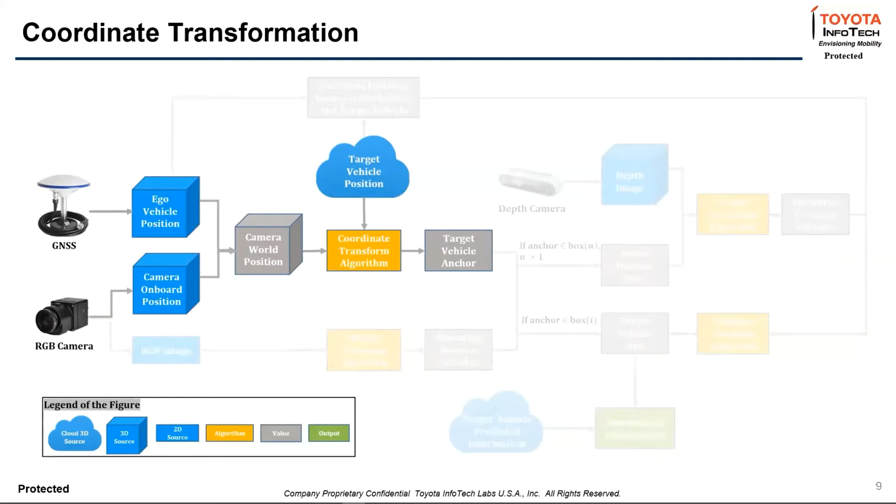So the first part is coordinate transformation. The 3D target vehicle location received from the cloud is transformed to a 2D point in the image plane, and that will help the identification of the target vehicle in later steps.

Generally speaking, to transform a 3D world coordinate PW in this figure to a 2D image point PI here, two matrices will be involved. The first is the extrinsic matrix, which transforms PW in the world reference frame to PC in the camera reference frame.

So the extrinsic matrix contains the parameters used to identify the transformation between the camera reference frame and world reference frame. So it's still a 3D point, but after the transformation, the reference frame is changed.

And the next step is using the intrinsic matrix to transform a 3D point PC to a 2D point PI in the image plane. The intrinsic matrix contains the parameters of the camera itself, such as focal length, lens distortion, and so on. After this step, the 3D world point is transformed to a pixel coordinate.

For example, if the left vehicle is our target vehicle, based on the location information from the cloud and the two matrices obtained by calibration, we could draw this point on our image plane for later use.

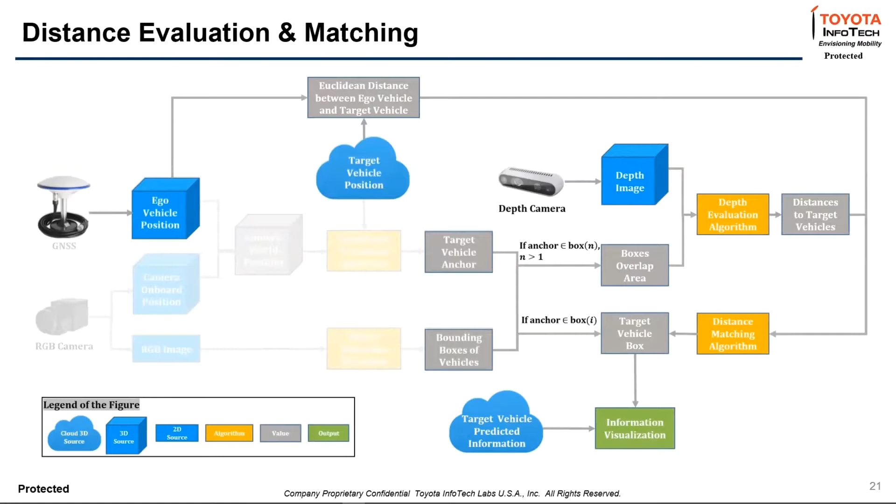So the depth image from the depth camera will be used to obtain distance information, and this will be compared with the true distance between the ego vehicle and the target vehicle to help determine the correct box.

So for cases like this, all vehicles inside are successfully detected, but the anchor point is inside both bounding boxes. So we could use the depth image taken at the same time and same angle, and that could help us get the distance from the detected area to the camera.

Since we want the distance to be as accurate as possible, we first redraw a smaller bounding box that will help avoid selecting points not belonging to the vehicle, like the road or the background sky. Then we randomly select a number of points inside this box, and we average them to get the distance.

We then compare this distance with the true distance calculated from the ego vehicle GPS and target vehicle GPS. After comparison, the box with minimum difference will be selected as our target box.

So we were using Unity to build a simulation to test and evaluate our framework. Here's an example: the cloud classified the driver in the right lane as an aggressive driver, so it will send this information to our ego vehicle.

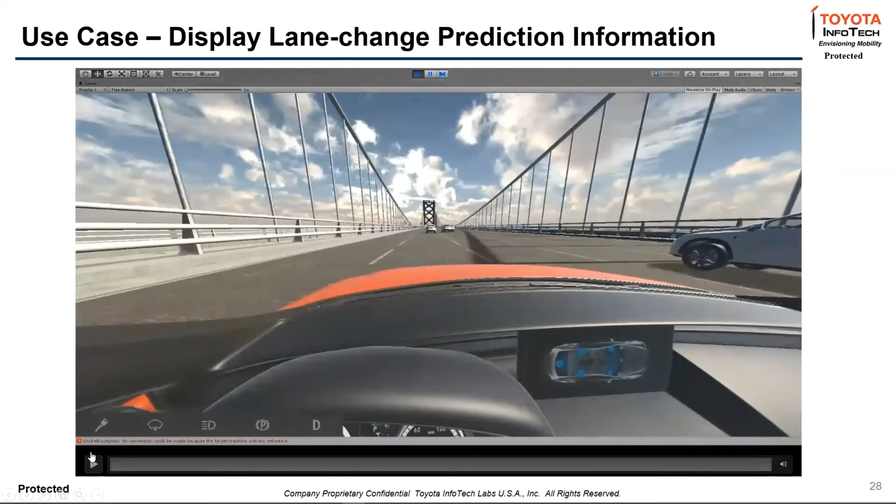So in conclusion, in this work we built a sensor fusion method for camera and cloud digital twin information. We implemented this driver visual guidance system in Unity simulation and showed the safety benefit of the proposed system. For future work, one direction is to improve the system's overall accuracy, and the other is to consider real-world implementation.

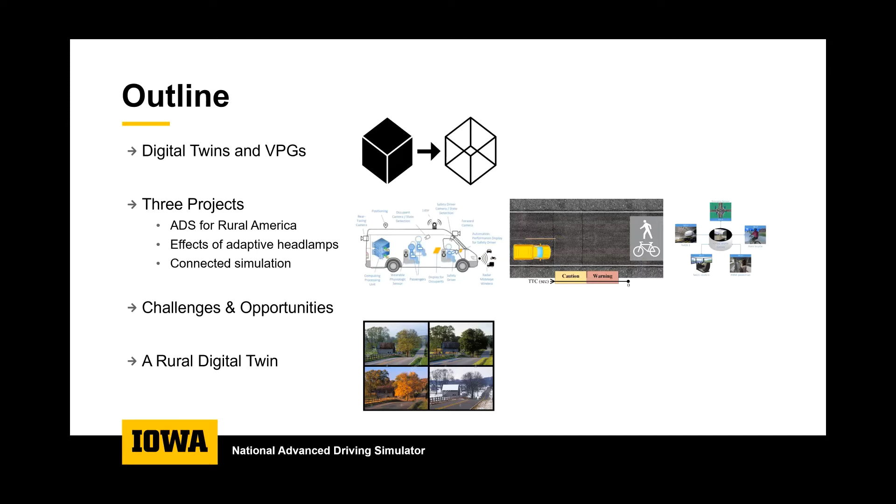So digital twins, you're going to hear a lot today about the cyber-physical element of digital twins, and it's a very exciting development. It is in many ways an evolution of digital environments and simulation that have come in the decades prior to this. The connection to the cloud is basically moving us from an era of small data into an era of big data.

And the idea of parallel driving, which I'll talk more about, makes the connection to our research, has to do with really modeling some of the invisible aspects of driving that fall beneath the surface of the more obvious and visible aspects of driving. For instance, the cognitive, or thinking, aspects of the driver, or the artificial automated vehicle.

I'm going to very quickly pull you now from this macro modern idea into a more micro world. You can think of macro maybe as being the big data and micro as small data. You could think of macro as being many actors in the simulation, and micro being few. However you want to think about it, that's sort of what I mean.

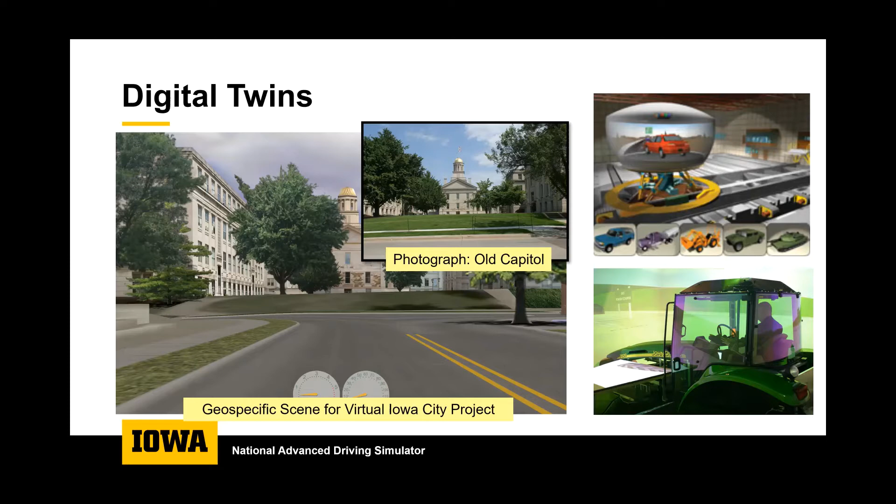Okay, so 3 projects I promised to talk about. The first one is called Automated Driving Systems for Rural America. This is a project that was fairly recently awarded by US DOT. We are getting started, but it's going to run for the next 2.5 years or so. Why are we doing this project?

Well, the benefits of automated vehicles are many, but in the safety aspect, we expect to see automated vehicles reduce and even eliminate all of these driver-based crashes, which make up 93, 94% of all fatalities. This first statistic is a bit striking - even though only 19% of Americans live in rural areas, nearly half of traffic fatalities occur on rural roads. So if we're serious about attacking this fatality statistic with automated vehicles and intelligent transportation systems, we must bring them onto rural roads.

However, rural roads have unique challenges, as we all know. They have outdated designs, poor paving and marking, limited line of sight. They have shoulder drop-offs.

There are animals that wander around, and the weather effects can be severe, not just during the weather, but after the weather. After a rough winter, a road that you see there would be just trashed and, you know, have ruts in it perhaps. And so it can be quite serious.

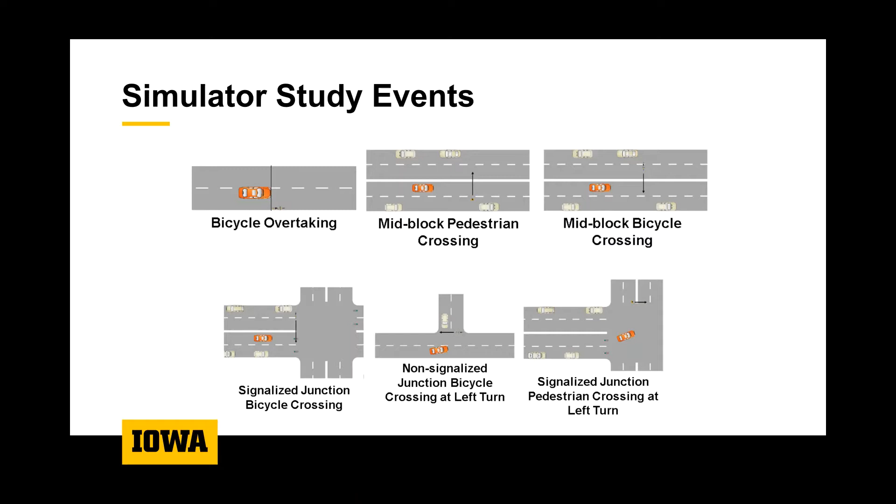And then the icon, I'm not showing a video of the icon because in the video, it just doesn't show up well. I mean, the pedestrian can see it, the bicyclist can see it, but they're kind of far away and it just doesn't show up in the video. So I can't show a good video of that.

Third study, developing connected simulation to study interactions between drivers, pedestrians, and bicyclists. And this was a study recently concluded, funded by US DOT Federal Highway. And there's some similarities with this one and the last one. It's concerned with pedestrian fatalities, of course, but also two-vehicle crashes, of which there were almost 12,000 in 2016. And the thing that these two statistics have in common is that they're concerned with the interactions between road users.

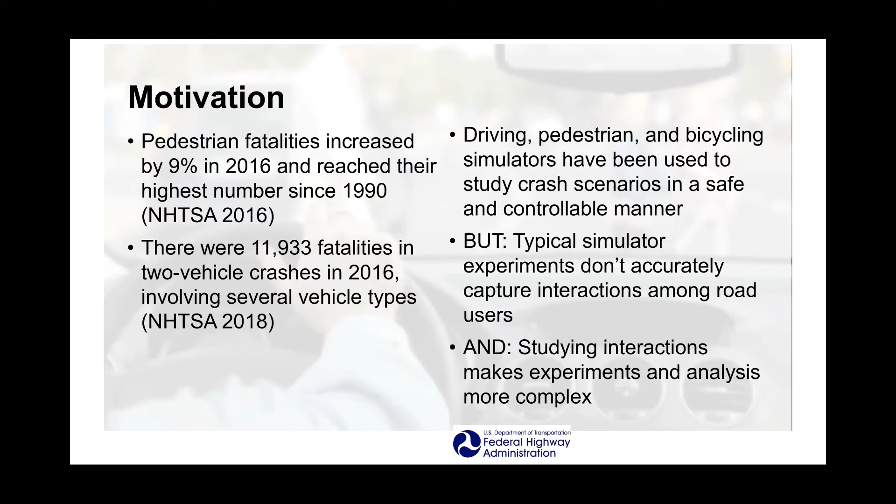And to do so, though, makes everything a little bit more complicated. Makes the experimental design more complicated, makes the analysis more complicated. Nevertheless, a worthy thing to do, we felt. So we developed an architecture to include the driving simulator, pedestrian simulator, bicycle simulator, miniSim, and scenario traffic into a common environment and designed a little database and used that to run a little data collection.

And importantly, the feature that we added here was the ability to create avatars for the pedestrian or the bicyclist and also for the driver inside the vehicle, so that you could see each other's avatars and you could look and you could gesture. So here's what that technology looks like. On the right, you can see a grad student, Shomo, who's wearing a headset. And on the left, you can see the driver in the NADS-1. And I don't know if you can see my mouse, but I'm circling the avatar for that pedestrian.

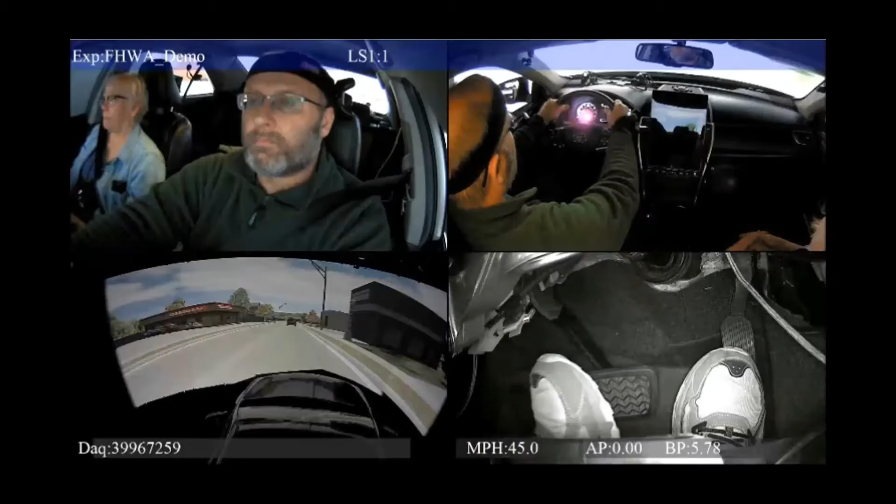So the driver can see the pedestrian is seeing the same virtual world, sees that red car, sees the driver's car, and you can see he's waving now and saying, I give you permission to drive, I'm not gonna cross. And so then the driver shifts into gear and drives forward. So there's an example of some good interaction. But what's really interesting is to then see this with some novice participants. So we did a small proof of concept data collection. We had 14 pairs of drivers and pedestrians.

So here's an interaction between a driver and a pedestrian avatar. So there's a real person behind this pedestrian, and you can see some good gesturing going on. Now this pedestrian turns around and he's like, okay, cross again. In the real world, pedestrians don't just walk back and forth across the street over and over again, but they kind of did that in this study a little bit. Now here's an agent-controlled or computer-controlled pedestrian. Look at the differences in the behaviors.

Now this is not bad animation. This is pretty good animation of a pedestrian, but there's no looking, no turning of the head. There's no indication that there's interaction at all. So here's another driver. That's a computer-controlled avatar. Again, no interaction really whatsoever.

And then here's an interaction between the driver and a human-controlled avatar of a pedestrian. Now this pedestrian turns around, looks like, oh, they want to go. And the driver did a flurry of foot movements from their brake to their gas, like she wanted to go, but she ended up stopping. And now here's the same thing from the point of view of some of the pedestrians.

They're able to see the same world, and they wear trackers on their wrists, on their ankles, and one you can see on the back of the waist. So that's 1, 2, 3, 4, 5 trackers. And then the HMD also counts as a tracker. This is the Vive Pro. So you can see in the background, there's a base station. Vive needs base stations to do the tracking.

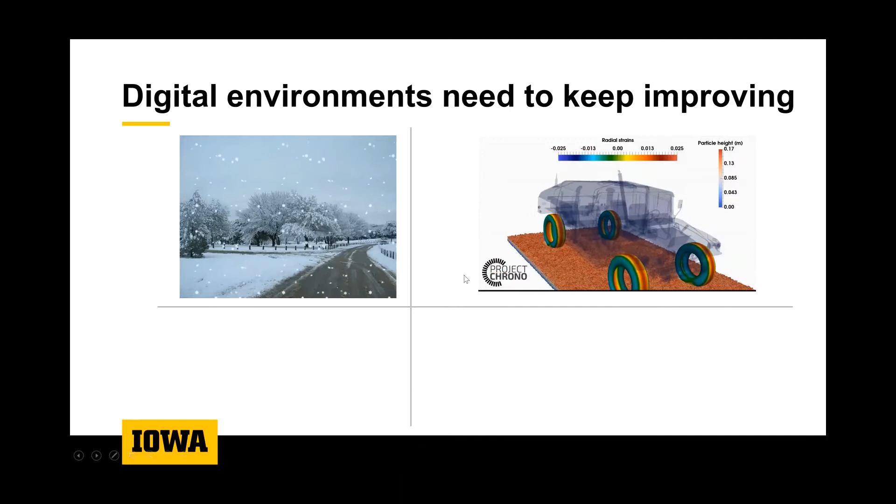It's one of the things that Iowa was very famous for a long time. And this particular example is coming from Project Chrono, which our colleagues up at University of Wisconsin work on, along with another team at University of Parma. So they're doing fantastic work on high fidelity vehicle dynamics. And I think that these are going to be critical to operate in the more challenging environments at the extreme edges of their performance, okay?

And then these two challenges now bring up a whole other challenge, which is the verification and validation of these simulation environments. We know that V&V is a challenge for simulation already. Every simulation tool that you put into the mix sort of needs to be validated on its own to know that you actually have trust in that tool. And now I'm proposing to make the visual environment more complex, to make the vehicle model more complex. That vehicle model may go from having tens of parameters to having hundreds of parameters. Big challenge.

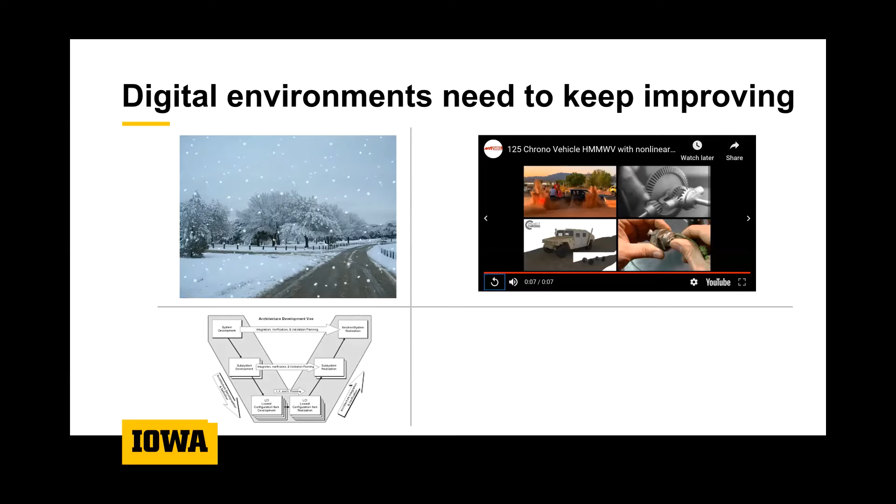One more challenge I'll point out. We're going to need to move from an environment of sensor simulation that says, oh, I can model a LiDAR, I can model a radar, I can model a camera, to one which says, well, is your LiDAR model modeling a Luminar or a Velodyne or an Ibeo? What exactly are the characteristics there? And how does each one differ? And are they validated models that we can use for a particular manufacturer of vehicle? So all of these things are ways that VPGs need to evolve into digital twins and need to evolve further and further. And they take more processing power, they just take more work.

All right, so now I'm getting to a point where I'll start to try to take you back from the micro up to the macro, if I do my job anyway. So my vision for a rural all-season digital twin would look something like this. We're doing this great study from USDOT, where we're collecting all this data on a rural environment. So we should go ahead and model that environment using the data that we're gathering, the HD map that we're creating, in order to have a digital twin and VPG capability.

The sensor data, we are collecting this data all throughout the year, day and night, all four seasons. So we should be able to come up with good models. I don't know how important it is to differentiate summer from spring, but capturing those winter conditions certainly will be very important. Not just because there's snow on the road, but there's no leaves on the trees, and the whole picture of the environment is going to look different.

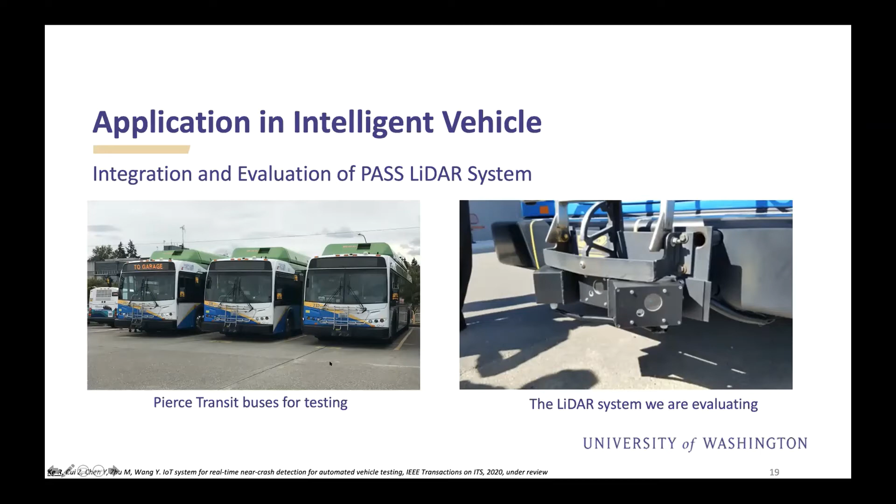These are the Pierce Transit buses we are installing our systems on. On the right picture, this is the LiDAR system we are evaluating. They have 3 LiDARs for collision avoidance and detection, and we are trying to evaluate it.

Before installing our system on the buses, we tested the system in some cars, basically our personal vehicles, before officially installing them on the buses. I put a dash cam, a power inverter, the NVIDIA device and some GPS modules in my own car and drove it around for some time to collect data. Here's the software flow diagram for the system.

The cool thing here is that with the AI-based detection results, there are bounding boxes, and we modeled those bounding boxes and found it's very useful information. With a camera model and some new algorithms, we can use the bounding boxes generated by the deep learning detector and tracking results to get the TTC, the time to collision, and horizontal and longitudinal motion information from just a single camera. And we developed pattern identification rules for the near crash.

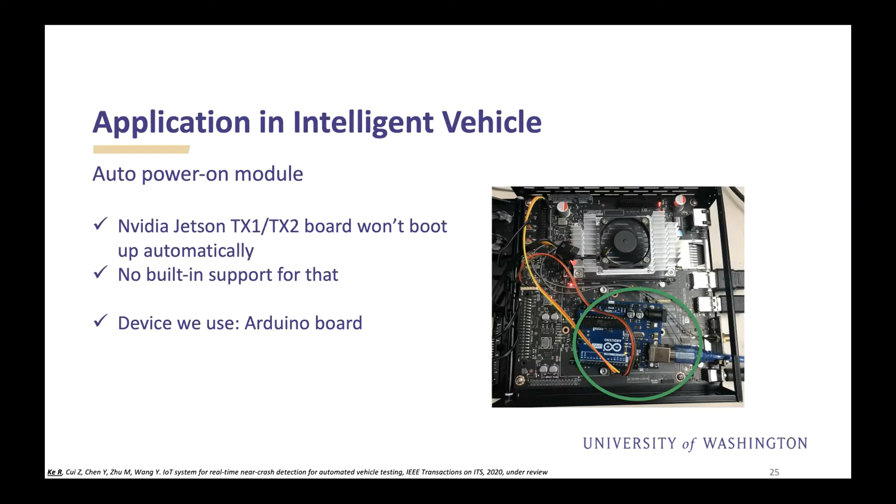We did some installation in August, and here are some system components. We also developed an auto power-on module, because the NVIDIA Jetson unit cannot boot up automatically, but you don't want to push the start button every time the bus starts off. So we used an Arduino board - although it's overkill - for the auto boot up.

Here's some data we collected from the different systems, and we also sample some random events to check if there are any false negatives. Here's a short video I uploaded, and you can see the detection when a near crash is detected. For demonstration, we use a red box instead of a regular green box for the detection.

I also want to mention that for this video, we did not really do a lot of transfer learning or fine-tuning with specific datasets. This is just based on the COCO dataset, a pre-trained network. But you can see the detection of the near miss is still pretty good.

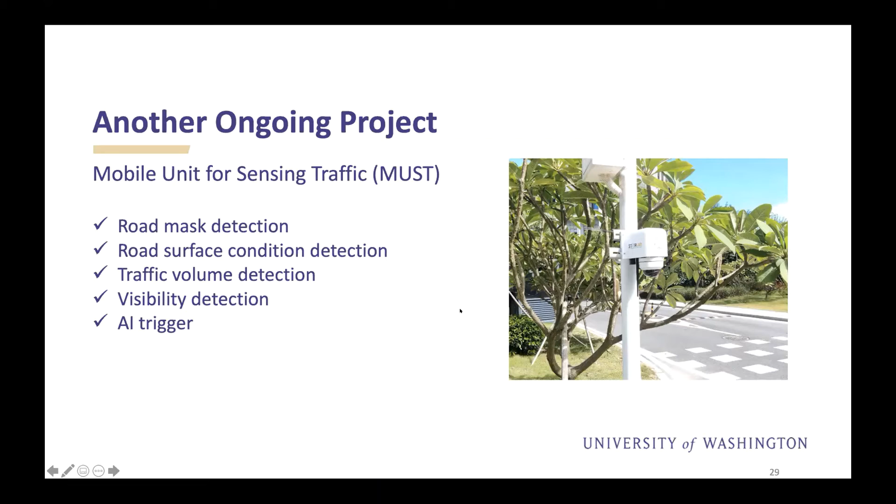That's a good question. For that specific system, it's for parking surveillance, but we can modify the algorithms - we can do it in a short time to adapt it for other similar applications, like monitoring traffic at intersections or roadways. The last thing I mentioned, we have traffic volume detection, and this is based on a similar detector and structure as the parking system. So pretty much it's the same IoT system architecture, but just running different algorithms.

Yes, yes, I see, okay. Another question comes from Yong Kam: the near crash detection you mentioned in the second part - is it a pure vision-based approach, or is it a hybrid kind of approach? And the second question is, do you consider any other data sources like CAN or IMU from the vehicle?

Yeah, for our part, the near crash detection is just a vision-based method. But as I mentioned, we do have communication via the CAN network with another LiDAR-based system. For the project, we are doing some data collection and evaluation, so we are not yet using the CAN data, like the IMU or G-force data, to detect the near crash. But there's potential, because we have already done the communication with the LiDAR system, and we can certainly do some fusion with their system in the future.

Mm-hmm. And based on that, maybe a follow-up question. I think you mentioned the hardware setup that you guys have is kind of overkill, so I assume the computational power for that is very strong, or the computational time of your application should be minimal, right? What's the ballpark? What's the scale of the computational time for your application?

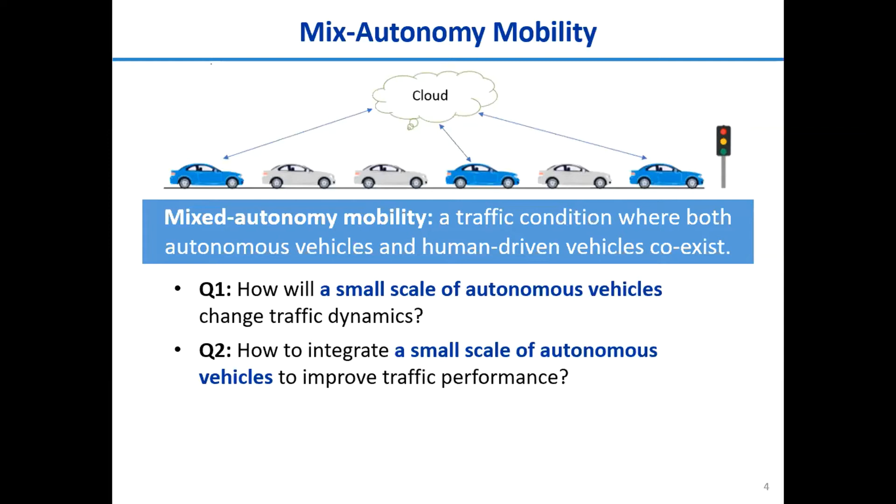So many of you can ask many interesting questions. I think some of you will ask, how will a small scale of autonomous vehicles change the traffic dynamics? And also, how can we control or integrate a small scale of autonomous vehicles to improve the global traffic performance, in addition to the performance of the individual autonomous vehicles? So these are two very interesting questions. I think most of you have thought about it or have shown some promising results from some other aspect.

In this talk, I'm going to first present some theoretical evidence of the high potential of autonomous vehicles in improving traffic performance, from a control perspective. And if I have time, I will also briefly touch on the practical design using distributed control and the scalable optimization for such integration.

Before going to the technical results, I would like to highlight two benchmark experiments for further motivation. I think most of you have seen this experiment. They are quite famous. So the first experiment was carried out in 2008.

Sugiyama and his colleagues put up this very beautiful experiment in a ring road setup. There were 22 human drivers, and they were asked to drive at 30 km per hour to follow the preceding vehicle. This environment is very simple. There's only a single lane, no traffic lights, no stop signs.

But we still see traffic waves emerge from this simple traffic scenario. So basically, it highlights that traffic jam can be caused purely by the stochasticity of human driving behavior, or some bad driving behavior of some human drivers. This experiment is very, very interesting. We know bad driving behavior can cause much loss of traffic efficiency. And what can we do if we have an autonomous vehicle in the system?

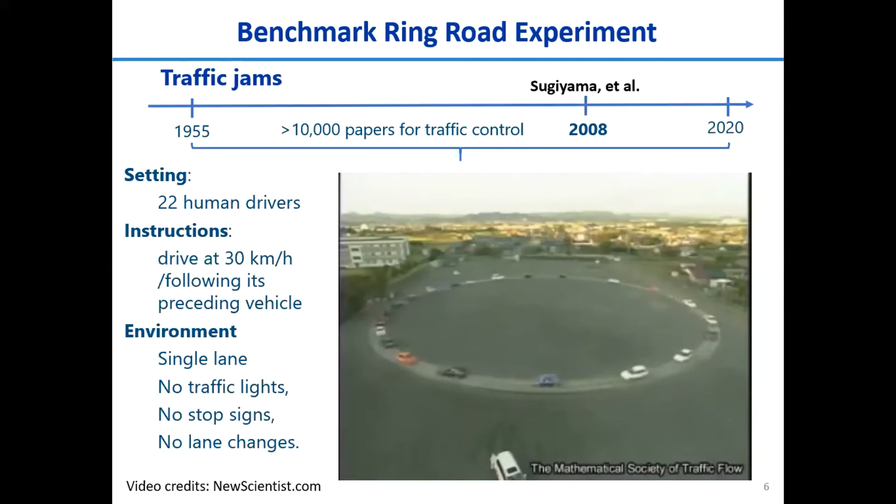I think most of you have also seen this experiment. About 10 years later, in 2018, Stern and his colleagues reproduced the experiment. They replaced one human-driven vehicle with one autonomous vehicle. In the beginning, the autonomous vehicle was not controlled, so it was driven by a human. Then we saw the traffic wave happen again.

After the controller is activated, the control of the autonomous vehicle can actually smooth out the traffic wave relatively quickly. This experiment is also very interesting. It shows that in practical traffic scenarios, control of an autonomous vehicle can do much good to improve traffic performance. I think one speaker of this workshop is the co-leader of this project. Probably he can talk a little bit more about this later.

So we have seen some good experimental results. What I am interested in is the theory behind it. Can we explain this kind of scenario? Can we explain why it works, why the autonomous vehicle can smooth out the traffic wave? There are some explanations, and here I would like to talk about it from a control perspective.

I'm also interested in whether this works in other setups, like with different numbers of human-driven vehicles, such as 100 human-driven vehicles and one autonomous vehicle, or a few other autonomous vehicles, or in other scenarios. Does the autonomous vehicle have the capacity to smooth out traffic waves quickly?

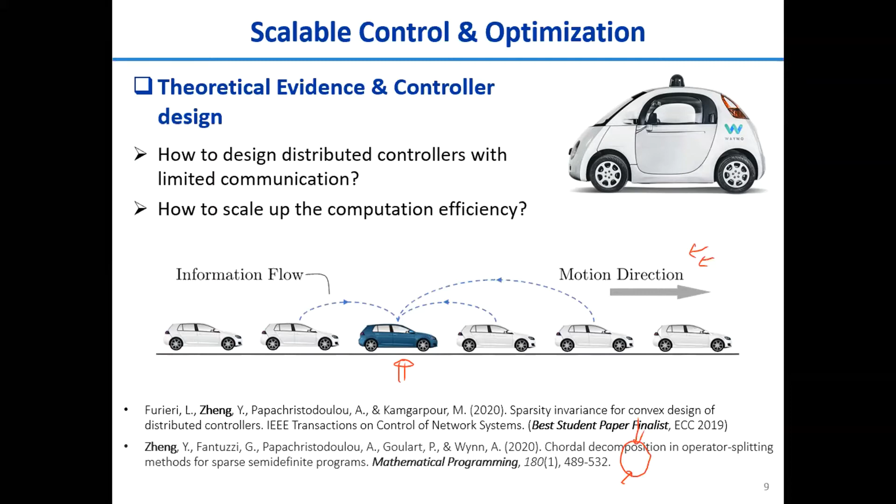So I'm going to talk about the first part, about some theoretical potential of autonomy in mixed traffic. Especially, I'm going to talk about stabilizability and using autonomous vehicles as mobile actuators. I'll introduce a new notion of leading cruise control in the first part. And if I have time, I'll briefly touch on the second part, about how to design the controller and how to solve the problem efficiently using some advanced control and optimization techniques.

Okay, to be concrete, let's first start with some system modeling. Just bear with me, there's a little bit more notation, but just the minimum to be concrete. In this system, we have two kinds of vehicles. The first is an autonomous vehicle where we have direct control. The second is a human-driven vehicle. They have a fixed car-following dynamic, and we cannot control them directly.

For the human-driven vehicles, they have a car-following dynamic, and normally it's something like this: the acceleration of this vehicle depends on its spacing, its relative velocity, and its own velocity. So this is a nonlinear function. Many works have identified this kind of structure, and there are human driving models to describe this behavior, but here we just assume this nonlinear function to describe the car-following dynamic. At one equilibrium point, the acceleration of all vehicles will be 0, and the relative velocity will be 0. So we have this equilibrium correspondence between spacing and velocity. Normally, as humans, we have a larger spacing if we're driving at a larger velocity -- a bigger velocity corresponds to a bigger equilibrium spacing. It's just a fact.

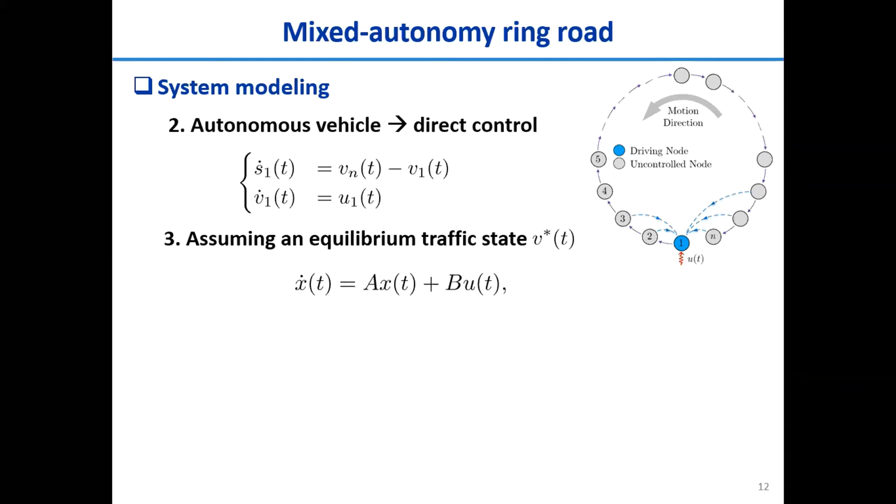For the modeling of autonomous vehicles, we just use a simple second-order model for this analysis. Basically, we can directly control the acceleration of the autonomous vehicle, so this is a second-order system. The global system will still be nonlinear. For analysis, we can linearize the system around some equilibrium traffic state, V star. Then we get this standard state-space form in a canonical form.

For this particular structure, we know the matrix A will have a cascading structure because it's a car-following dynamic -- each agent only has direct interaction with its preceding agent. So this kind of structure appears in the matrix. And again, because we can only control one node, only one element here is non-zero; all the rest are 0, meaning we do not have direct control for those nodes. So this is a network system with only one controllable node.

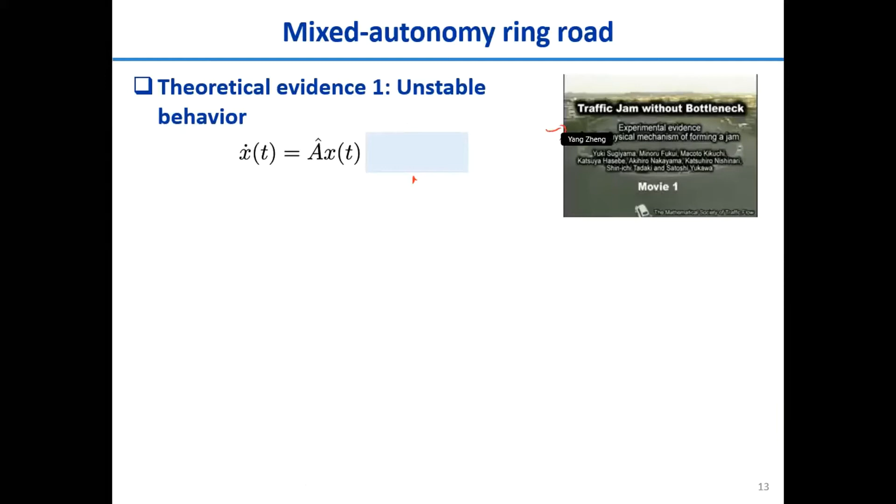With this setup, we can talk about some results from control theory. First, if we remove the control -- if all vehicles are car-following with a fixed car-following dynamic -- basically we don't have control corresponding to this setup. It's known in the literature that if the car-following parameter satisfies some condition, the system will be unstable. This parameter corresponds to the sensitivity of drivers to speed and spacing error. So if the driver has a very slow response, the system will be close to unstable, meaning the eigenvalues of this matrix will have a positive real part. Here are some simulations corresponding to different system sizes, the number of vehicles in the system, and for this parameter setup, we can see some eigenvalues with positive real part.

So basically saying this system is not stable at this particular equilibrium point. And then this is the time domain simulation. So this confirms the finding here. And basically we can also see the outcome from the experiment here.

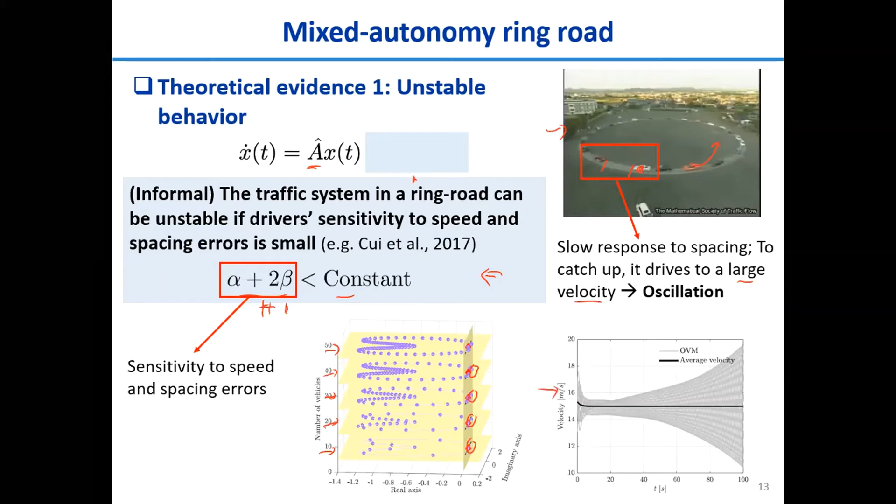So this driver has slow response to some spacing, and then it slows down and tries to catch up. So it will drive to a large velocity, and this kind of behavior will cause some oscillation, and the oscillation will be propagating along this system, and we will see the unstable behavior as we saw in the video before. Okay, this is the first theoretical result.

People know this. And the second thing is, what if we bring back the control of the autonomous vehicle? So we have one node that allows us to do some modification of the system. And then what happens if we have this kind of input here? So then in our paper last year, we proved that in theory, the linear system AB is not controllable, but it's stabilizable.

It's not controllable, which means there's a mode corresponding to the ring road structure that cannot be controlled, but all the rest of the modes can be controlled. So since that uncontrollable mode is stable, this system is stabilizable, which means the autonomous vehicle actually can change the traffic dynamic fundamentally. So we can modify the system, we can stabilize the system.

And this result actually is independent of the number of human-driven vehicles, which means if you have 100 human-driven vehicles and only one autonomous vehicle, in theory, it can be stabilized as well. But in practice, it will probably take a longer time and more energy. And this result is also independent of the car-following dynamic. So no matter what kind of car-following dynamic, as long as the linearized dynamic has this structure, our result holds. And so basically, this offers very strong control-theoretic support for the potential of autonomy in mixed traffic.

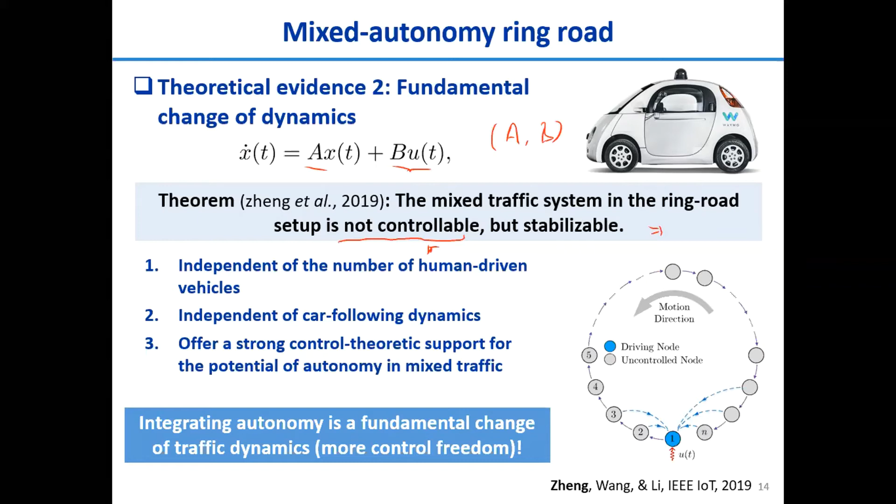And so basically, integrated autonomy is a fundamental change of the dynamic. So we have more control freedom to modify the dynamic, to stabilize the system, and to smooth out the undesirable traffic wave. Okay, this is the second evidence. And then we can do more. We can go beyond stabilization.

So basically, because the system is stabilizable, we can stabilize the system at another equilibrium point, not just at the original traffic state. And we have proved that the traffic velocity actually can improve to another value. The value will satisfy some bound, so there will be an upper limit, but it can be improved a lot. And this figure demonstrates the idea behind this theorem. So suppose all the vehicles are human driven, and then at the equilibrium point,

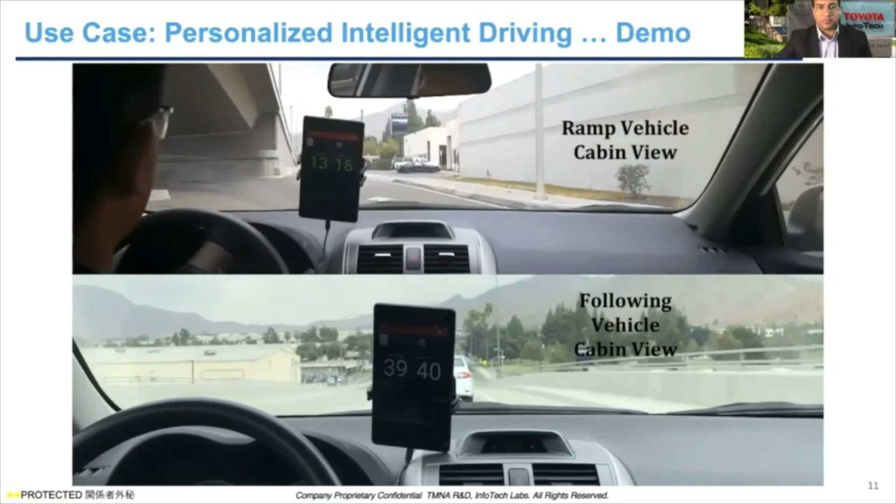Be careful, traffic may be merging into your lane from another roadway.

And what you're seeing on the screen is the speed advisory each driver sees. If they overshoot, it goes red. If they're undershooting, it's green, so they have to speed up.

So that was the demo we did with 3 real Toyota cars connected to the edge and the cloud network at one of our partners. So there is plenty of opportunity getting enabled with big data, with the car becoming an IoT device with multiple sensors, and the connected vehicle.

In order to realize this opportunity, we are building what we call the Toyota Mobility Service Platform, or MSPF. This really is a combination of our mobility platform, the data coming from the sensors, and, as I mentioned earlier, the disruption within the services industry, where you're not owning the product but still receiving value through services. And Toyota is trying to be the most reliable mobility service provider in the world, just like the most reliable car company in the world.

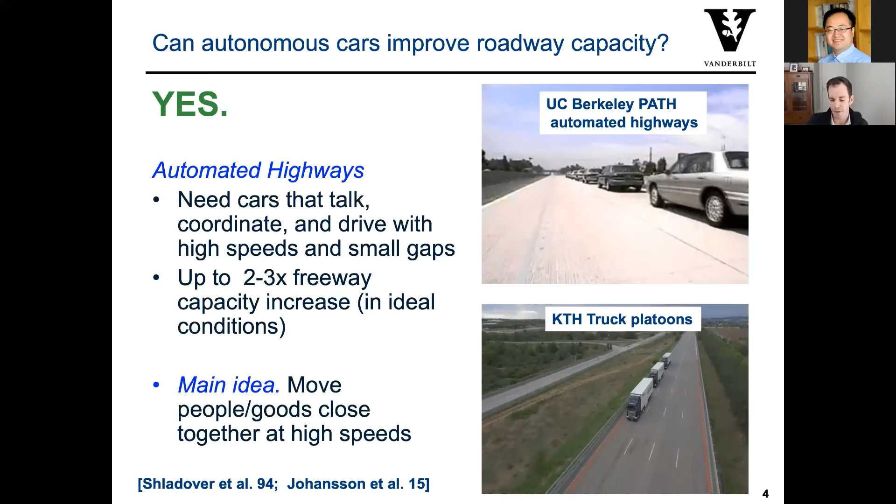So the core idea is, if you want to increase capacity, you need to be able to move people close together and at high rates of speed. Now, I just want to remind us that this is not only possible via technology. If you want to double the capacity of the roadway, all it would take is everyone carpooling. If you could pick up one more person, we'd effectively double the capacity of all the roads in the world. If you wanted to 3x the capacity, well, you could just pick up 2 more people.

When I start thinking about 3x increases in capacity, this is capacity in terms of people moved rather than vehicles moved. This is something that is going to be very difficult to do with automated vehicles unless we change their shape and physical dimension. So we should be looking at alternate ways to increase the ability to move people beyond pure vehicle automation. Now, on the other hand, I don't believe that vehicle automation is not going to come with some benefits. Quite the opposite.

I actually think that even self-driving cars at a small penetration rate can have a big impact on some of the most frustrating types of traffic congestion that we see on the roadways today. So in the time I have left, I want to show you some of the work that we've been doing to try to understand the impacts of vehicle automation to eliminate phantom traffic jams, and also some of the limits that we see with current vehicle automation systems, with an eye towards what we can do in the future if we were going to try to get high penetration rates of technologies out on the roadway that can make traffic better for everyone.

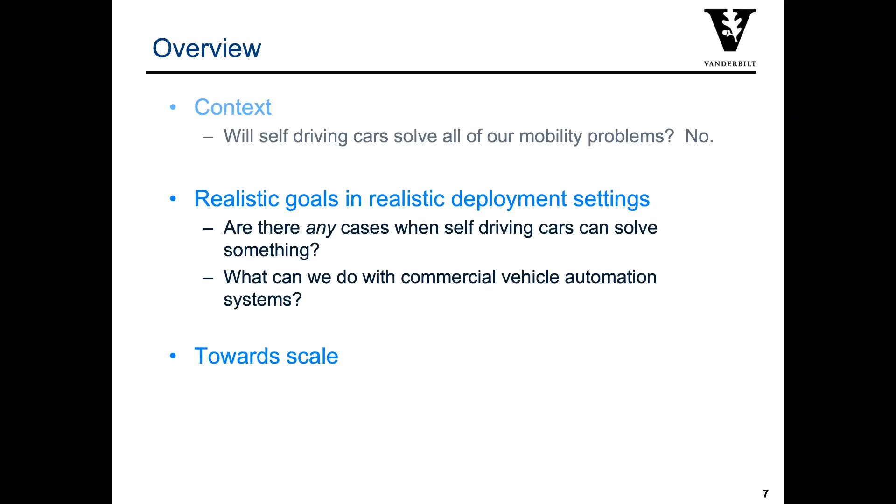So we saw this video earlier in one of the talks, the famous experiments that were done in Japan about a decade ago that carefully, experimentally isolate that human driving behavior alone is enough to create these so-called phantom traffic jams. You see the cars all driven by humans racing around the track, and just due to the nature of human driving, fundamentally the instabilities in the car following dynamics that humans operate under, you see these small perturbations grow into traffic jams that are persistent on this track.

And we know that these jams don't just exist in these isolated laboratory conditions, but you can observe these on open roadways. This is a video from a roadway in Georgia, where again, you can see this collection of vehicles that are completely stopped, propagating against the flow of traffic, seemingly occurring without an obvious cause, but are in fact due to the way that humans drive. And that's the point, right? If you have level 1 vehicle automation systems, those replace some of the driving tasks and some of the operational domains with automation instead. And that gives us the potential to control these types of effects so that they no longer occur.

I see an old friend, Baik Hoh, from my days at Nokia on the call here today.

You know, a decade ago, we were rethinking about how putting GPS-equipped phones in cars, even at low penetration rates, could fundamentally change the world for traffic estimation. Today, we're using those same ideas and not looking at phones as the key enabling technology, but looking at the cars instead as the enabling technology. Automated vehicles, even at low penetration rates, may have a game-changing ability to change the way that we manage traffic flow, specifically to eliminate these types of very frustrating phantom traffic jams.

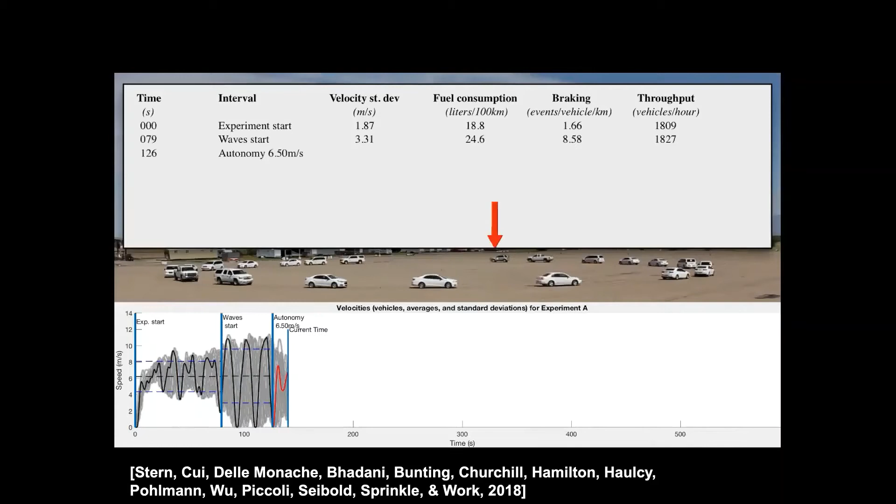In 2016, we teamed up with some of our partners at Rutgers, Temple, and the University of Arizona to repeat that experiment that was done by Sugiyama and their collaborators in Japan. This time we're on a circular track in Arizona, and this car that is being traced with a black arrow is a several $100,000 automated vehicle platform run by Jonathan Sprinkle at the University of Arizona. We initially have all the cars controlled by humans, and then when the arrow turns red, it's now being controlled. One car is being controlled with a controller that is designed to smooth out the jam, or to stabilize the flow on the ring is another way to look at it.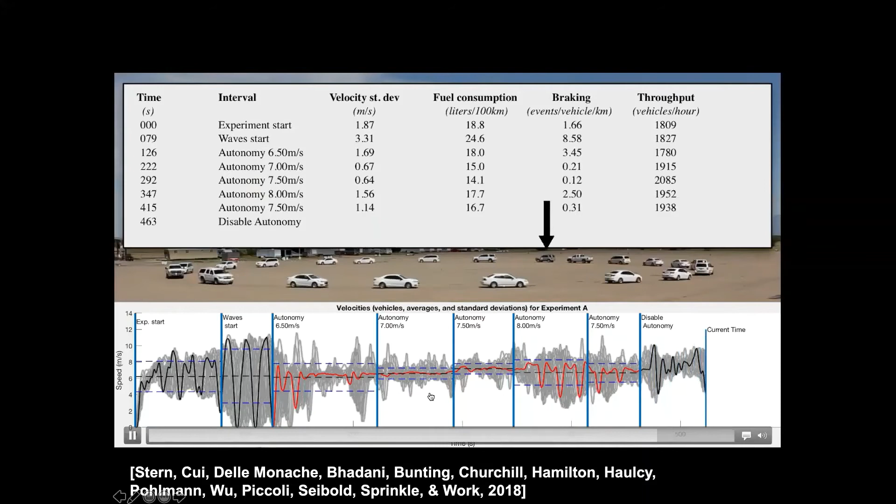By controlling that one car, the remaining 20 cars on the track, all controlled by humans, had a significant reduction in the amount of stop and go driving they experience, which led to a significant reduction in the fuel consumption. We measured the fuel consumed of all the vehicles via the OBD2 ports on those cars and measured a 40% reduction in fuel consumption when we compared the traffic in this highly oscillatory stop and go driving, which was observed when all the cars were under human control, compared to the condition where one of those vehicles is switched to an automated vehicle platform that is designed to smooth out the traffic flow.

So this work was very inspiring to us to recognize that there's potential to fight phantom traffic jams with vehicle automation. But the challenge, of course, is that to scale, we can't do this with vehicle platforms that are going to cost hundreds of thousands of dollars, or we'll never be able to get to the number of vehicles needed to do this on an open roadway.

So in the meantime, we've started looking at what you can do with these level 1 and level 2 vehicles that are available on the roadway today. And one of the open questions is, can the current vehicle automation technologies already get us the benefits that we saw in the previous video?

Well, it turns out that quite a bit is known in terms of how these phantom traffic jams occur that date back to the traffic science community in the 50s and 60s, as well as the vehicle control communities. So there were vehicle experiments that were being done by researchers and by General Motors in the late 1950s and 60s, where they were measuring and trying to model the way that humans drive. And very quickly they realized that it's possible to see these so-called instabilities or string instabilities where small oscillations grow into large stop and go patterns.

And on the vehicle control side, people started looking at what would happen if you could automate those vehicles and force them to maintain a constant spacing to the vehicle ahead, a constant distance to the vehicle ahead. And it was quickly discovered that constant spacing-based policies lead to these types of string instabilities where phantom jams arise.

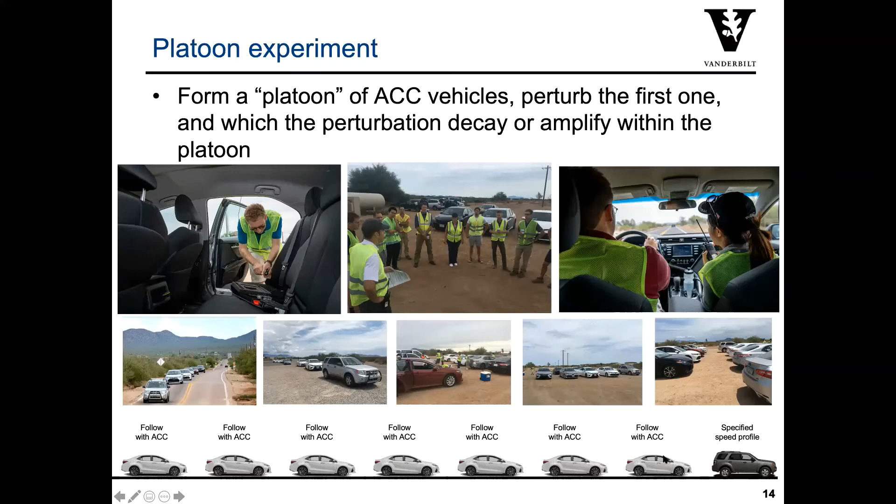And there is no communication between the vehicles, but they're all in car following mode, right? So we set the set point of these adaptive cruise control systems well above the speed profile of the lead vehicle to make sure that they're not running a cruise control mode, but in fact running an adaptive cruise control mode. And here's an example of what these types of experiments look like.

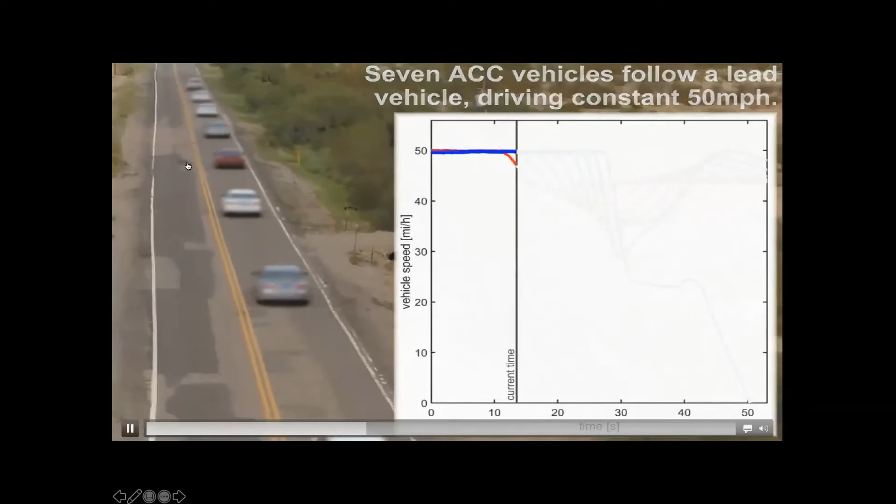So we have a straight stretch of roadway, and we'll be using this roadway to drive vehicles at approximately 50 miles per hour. The first vehicle that you'll see as it enters the roadway is a vehicle that is under complete automation, and that's for consistency of the experiments. All of the other vehicles you see on the road here are all vehicles running stock, commercially available adaptive cruise control systems.

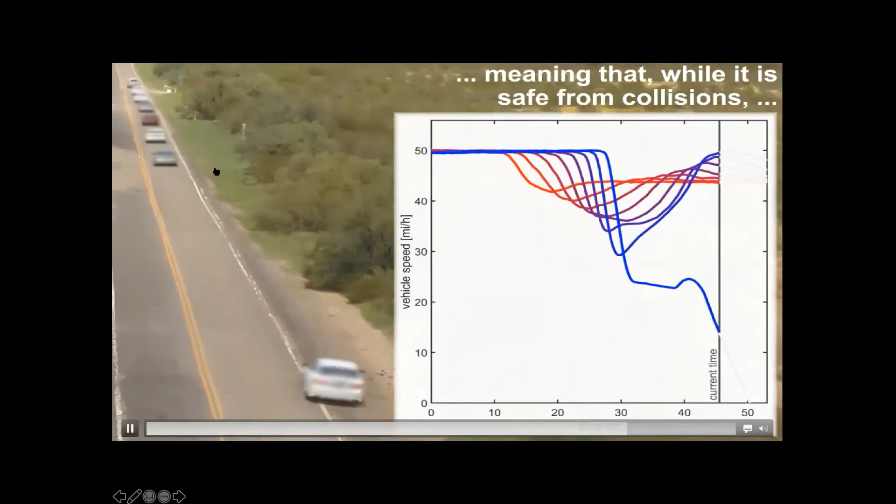The lead vehicle slows down about 5 miles per hour, and that 5 mile an hour slowdown, as shown in the plot here, is amplified to a larger slowdown to the vehicle behind, which then, of course, has a vehicle behind it that slows down more. The vehicle behind that slows down more until the last vehicle in the platoon is dropping below the minimum operating speed to run that adaptive cruise control system. And so we ask the driver of that vehicle to leave the experiment if the ACC system turned off. This is experimental evidence that these commercially available ACC systems are not string stable.

It's very difficult to test experimentally large platoons of vehicles to identify string stability. So some of the work we've been doing is coming up with ways to do this using either 1 or 2 vehicle experiments.

The setup is very similar. We have a lead vehicle, which serves as an input to the stock ACC system. We take the following vehicle and model all the complexities of the real ACC system, the engine dynamics, the vehicle dynamics, as a very crude model that simply says the vehicle will accelerate or decelerate as some function of the inputs to the system: the space gap between it and the vehicle ahead, its velocity, and the velocity of the vehicle ahead. What these models can look like is something like the following.

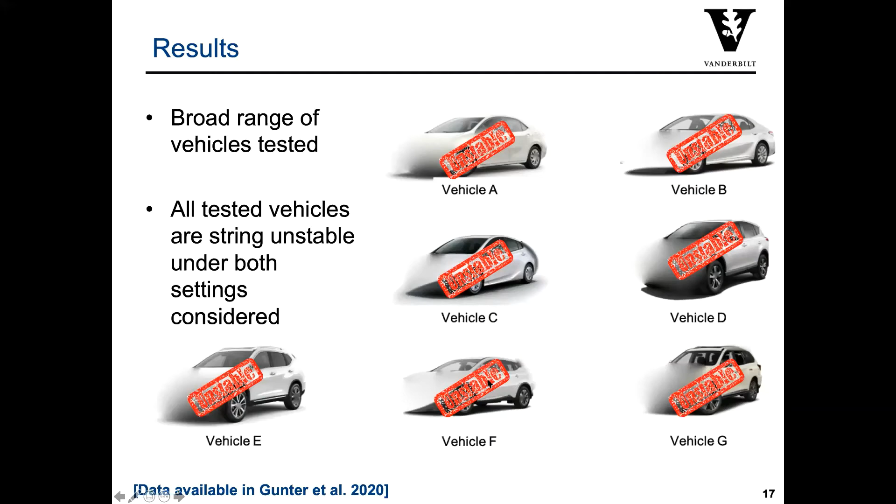To determine that, we need to compare how these vehicles behave relative to how human drivers behave, and that we have not yet done. Another part I want to emphasize is that in addition to confirming the model is good, we also need to do some sensitivity study to make sure that if we have errors in the estimated parameters, it doesn't change the string instability finding.

The way we do that is we first calibrate the model by minimizing a loss function that characterizes what the model says the trajectory should be versus what we actually measured empirically from the data. Then we use the estimated parameters to determine the string stability. And then we set a new optimization problem constrained to find the opposite stability answer.

So we initially calibrate and find that the models are string unstable. Then we recalibrate with an additional constraint that says, find me the best fit parameters that would lead to a string stable finding instead. What we see by adding that extra constraint is that we would have to increase the fit of our model error by on the order of 25% in settings when we're following the vehicles ahead very closely. So we have some confidence that those string instability findings are correct, even without doing the multi-vehicle platoon tests for all of the vehicles we've tested.

In the 11 minutes I've got left, I want to show you some of the things we're doing now, recognizing that it's possible with very expensive vehicle platforms to eliminate phantom traffic jams, and recognizing that commercial vehicle automation systems available today don't quite deliver the flow smoothing benefits we'd like to see.

So what we're really trying to figure out now is how we go towards traffic flow smoothing at scale, no longer on the single track, leveraging essentially the same types of technologies that are in these ACC vehicles, but minimally modifying them such that we can deploy them in large vehicle numbers on actual open roadways in the United States.

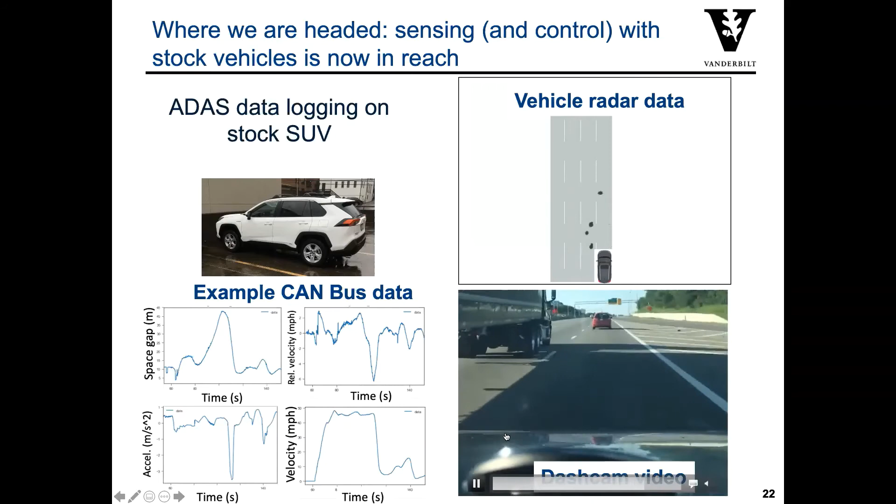On the instrumentation side, it's very easy to instrument a circular track with a camera and capture the dynamics of all the vehicles. It's much harder to do this on an open roadway. In fact, vehicle-based trajectory extraction on roadways has been an area with very limited data until recently for the traffic science community. In 2006, the US DOT sponsored the Next Generation Simulation Project, which produced several data sets, one of which is the Interstate 80 data set that captured about 1,600 feet of vehicle trajectories collected over a series of about 45 minutes.

Now, this data has served as the backbone of the traffic simulation community, but the challenges are that it's data from 15 or 10 years ago, and we need it to be longer in length, longer in time, and we'd ultimately like the ability to put our own vehicles into this trajectory stream and understand the consequences of putting our control algorithms out there on the overall flow.

So with that basic idea, we've been working closely with the Tennessee Department of Transportation, which is currently building a tens-of-millions-of-dollars project called the I-24 Smart Corridor. I-24 has about 150 to 170,000 vehicles a day passing through it, and it has this characteristic phantom traffic jam behavior that we know is very fuel inefficient and we'd like to eliminate. We're taking a subset of this roadway, about 6 miles of it, and instrumenting it with several hundred 4K resolution cameras that provide overlapping fields of view allowing trajectories to be extracted, much in the same way the NGSIM experiment did many years ago.

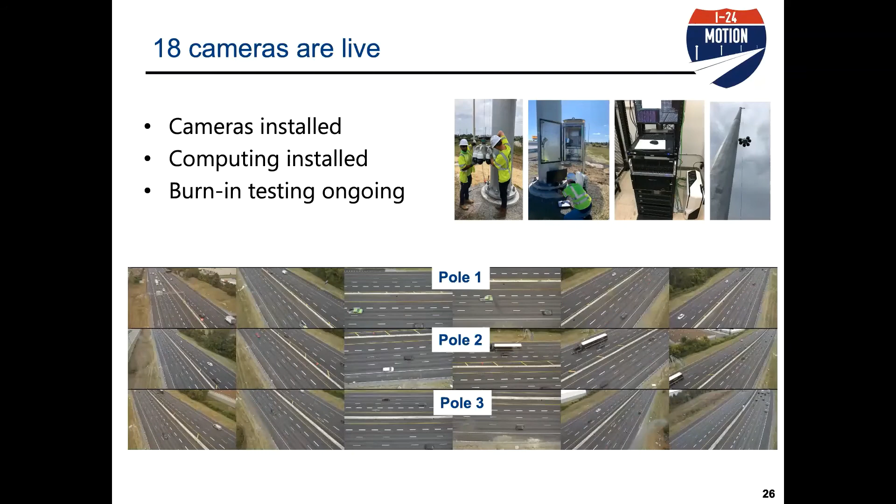We're seeing something like 99.95% of all the frames captured from this video data being stored by our systems, which will ultimately allow us to do trajectory extraction.

On the trajectory extraction side, it's a non-trivial feat to produce trajectories out of 4K resolution video data in real time, although the overarching process is a relatively standard approach. We start with an input scene from a video and use a detector, pick your favorite YOLO or ResNet or other detector, and locate the bounding boxes of the vehicles in the scene.

Then we track these vehicles over many sequences of frames by running a Kalman filter that describes their dynamics and where we should expect to see them in the future, so that when we get another update, we know which vehicles are which and can produce trajectories across the scenes. The final step is to take the bounding boxes from the image space and convert them into real world space.

Just to give you an idea, this is a 5-minute snippet of video from one camera we were doing a unit test on, and you can see the types of scenes we'll be able to collect with this system. We carefully designed these camera views to not only be overlapping but also to avoid occlusions. In other words, we won't have cases where vehicles are hidden behind other large vehicles based on the vantage points these cameras were installed in.

I want to give some thoughts on the scale of data already being collected from this validation system. I mentioned the NGSIM experiment. One way to understand how much data was produced in that data set is to count the total number of vehicle miles traveled in the trajectory data. There was 45 minutes of data with quite a few cars passing through. Summing up all the distance traveled by all the cars, you get about 1,800 vehicle miles traveled in that data set.

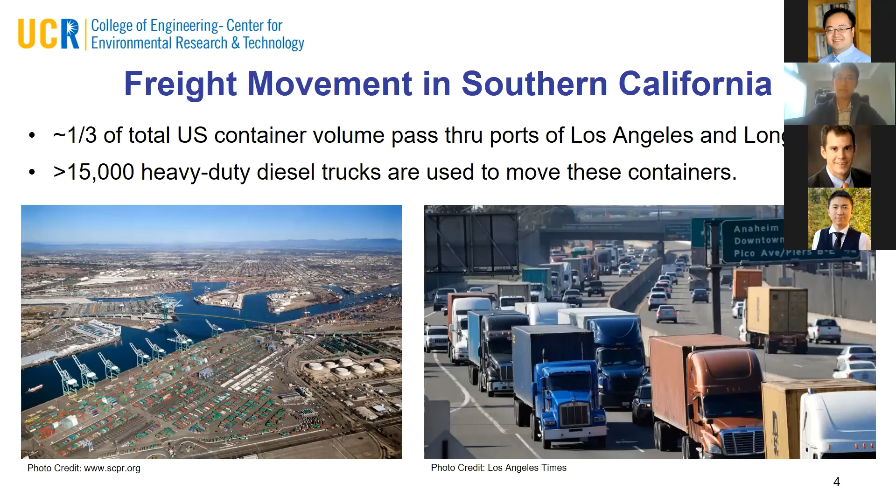All right, so I would like to start by providing some context and motivation for this work. Some of you may be familiar with freight movement in Southern California, and you may know that the ports of Los Angeles and Long Beach together carry about a third of total U.S. container volumes. Think about it, a third of all freight goes through these 2 ports. And that's why they need a lot of trucks to move containers in and out of the port to local warehouses before being distributed throughout the country. Now there are more than 15,000 heavy-duty trucks doing this job around the ports.

Now, these trucks are not the same as those that drive on freeway across state, right? They don't just cruise on freeway for a long time. Actually, they drive mostly in urban areas close to the ports. And when these trucks drive in urban areas, they will have to encounter traffic signals and intersections. And at that location, there's a lot of inefficiencies. When trucks have to come to a full stop at a red light, it increases their travel time, increases their fuel consumption, and produces a lot of emissions as well.

So one thing that can be helpful in terms of reducing those inefficiencies is connected vehicle application. And the one that we are using right now is called connected eco-driving. The concept may be familiar to many of you. Basically, if you are able to communicate with the traffic signal, receiving signal phase and timing information from the signal, then you are able to use that information along with the current state of the vehicle to decide an approach that will optimize either your travel time or your fuel consumption, among others.

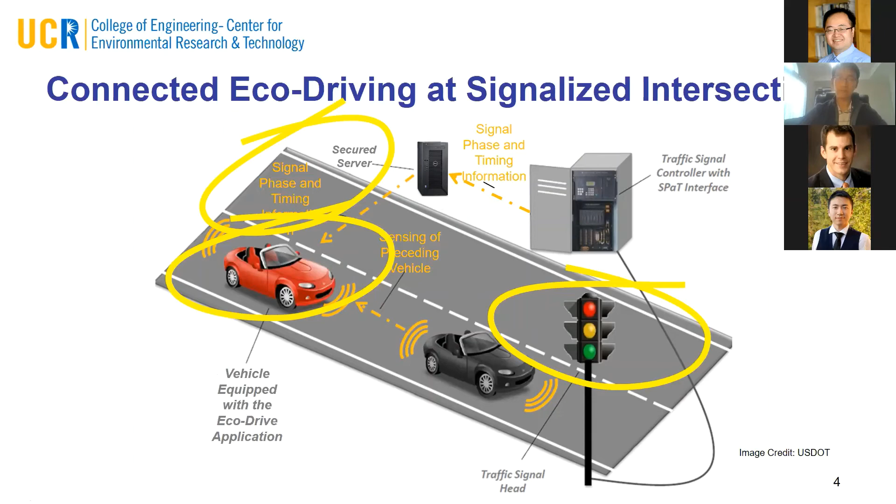The third scenario is that you are getting a red light, but you know that it's gonna turn green soon, so you may want to slow down ahead of time so that you reach the stop bar or the intersection by the time the light just turned green, and that way you avoid having to come to a full stop. But in some cases, that may not be avoidable, and you still have to come to a full stop, which is scenario 4.

In terms of system architecture, we have to have 2 sides of the coin. We have the infrastructure side, and then we have the connected vehicle side. In terms of infrastructure, there are many ways of instrumenting or enabling connected intersections. So in the diagrams, there are 2 architectures that you can see.

The first one is all the intersections, if they are already connected to the city TMC, either through fiber optic or whatnot, then it may be easier to just connect to the city TMC and get SPAT data from there. But if that's not the case, then you can also instrument the individual intersections and then have those intersections send SPAT information to the server directly.

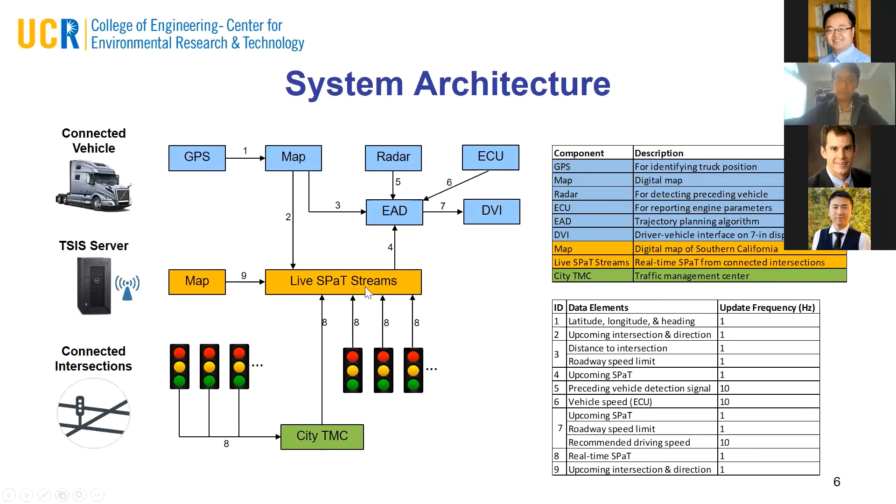On the vehicle side, we have 4 different major modules. The first one is localization, which is to be aware of the current location of the vehicle with respect to the intersection. So basically, this is just done by GPS or GNSS, and then if you have the map of the network, then you can do a map matching to determine the distance from the intersection and also the travel direction.

And then the next module is perception. So aside from the vehicle, the connected vehicle, you have to be able to be aware of your surroundings, right? So this is the usual sensor, whether it be camera or radar, to sense the vehicle in front of you, and then use that information in the design of your trajectories, which is the next module.

Once you have the information about the location of the vehicle and use that information to get SPAT data from the traffic signal, and you are aware of what may be blocking the path of the vehicle, then you can use all that information to optimize the vehicle trajectory in a way that minimizes fuel consumption or travel time.

And the last part will be the control module, which is you provide that optimized trajectory, implemented automatically or provided to the driver and have the driver try to follow that as best as he could.

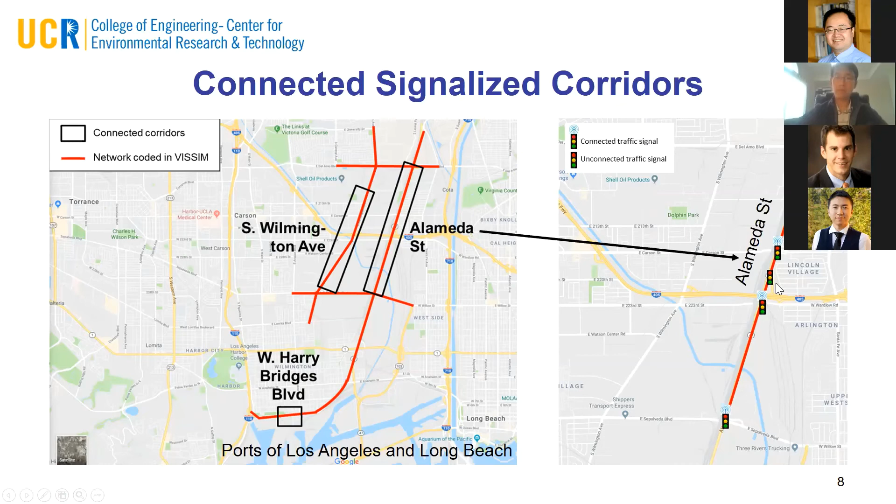So we have worked with local agencies in Southern California to instrument connected signalized corridors close to the ports of Los Angeles and Long Beach. We have 3 separate corridors, and on each corridor we have 5 connected intersections. You may see on the right here that on a single corridor, not every intersection is connected. With limited budget, we can only connect 5 intersections for each corridor.

In terms of making them become connected intersections, basically we install a router that is connected to the existing traffic controller. And then the router basically just forwards SPAT information from the traffic controller to our server. And this was done back in 2018, so we were still using 4G LTE at that time.

So a little bit about the driver vehicle interface. We opt for a very simple design to make sure that it's not overwhelming the driver. So if the driver is approaching the intersection when the signal is green, he will see from the signal head that the current status of the light is green, and then he will also be given a speed band which shows the range of speed that if he stays inside this band, he will get to the intersection when the light is still green.

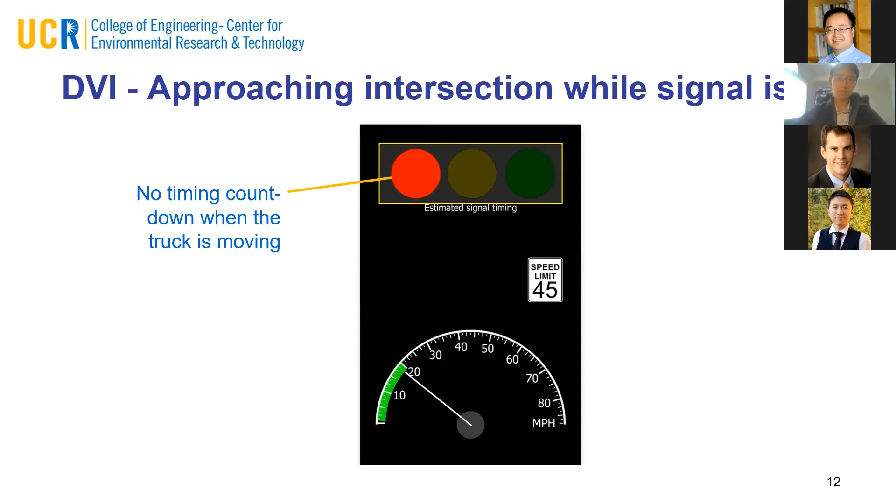Now, in cases when it's not possible to avoid stopping at the red light, then once the vehicle becomes fully stopped, the system will show the timing countdown, so the driver can know how many seconds are left before the light turns green again.

And whenever the driver is following another vehicle, then he will be notified that there is a preceding vehicle ahead, and that will turn off the recommended speed, because when there's a preceding vehicle ahead, we want the driver to focus on the vehicle ahead and make sure that he doesn't cause any accident.

So last year, we conducted a few trials of the system on real roads, in Carson, California, close to the ports. And we also organized a demonstration in March, attended by almost 100 attendees. We just took the attendees on the truck and drove around the route that we decided. It was a successful event, and I will show some videos from the field trials.

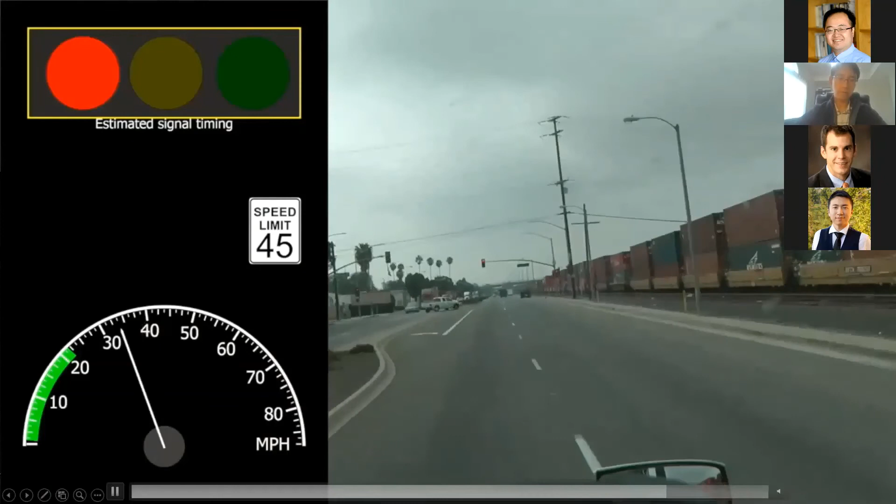In the deceleration scenario, right now the light is green, and you don't see any recommended speed because there's no feasible speed that will allow the driver to get this green without exceeding the speed limit. Now the light turned red, and there is a recommended speed because the system knows how long the red phase will be. So it encourages the driver to slow down. And now when the light turns green, it encourages the driver to speed up again.

Based on those initial field trials, we tried to extract trajectories under different scenarios and match trajectories when the driver had used the system versus when he did not. And based on the best match that we can find, we estimated the fuel savings due to the system, and we found that for the acceleration scenario, the fuel saving was around 9%. For the deceleration scenario, the fuel saving was around 4%.

Now, these numbers are not as robust because the traffic conditions that the driver faced and all the other influencing factors when the driver drove these trajectories may not be comparable, right? Because in the real world, there are so many factors that can influence the effectiveness of the connected eco-driving system. I list some of the factors here: traffic patterns and surrounding vehicles, and even weather.

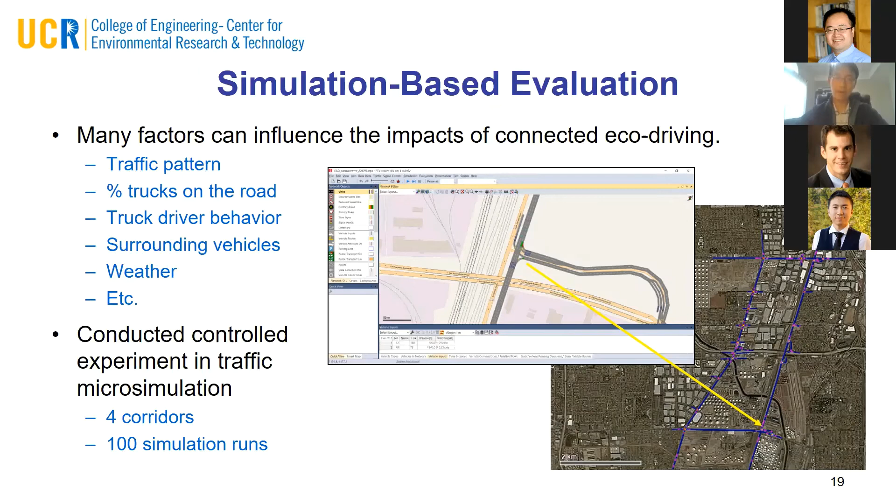So in order to do a more robust evaluation of the effectiveness of the system, we opted for a simulation-based approach. And in simulation, you can control all those factors, right? So it's like doing a controlled experiment. So we did that for 4 corridors, and for each corridor, we ran the simulation 100 times.

In the simulation, we basically used VISSIM, traffic microsimulation software, and implemented the algorithm that calculates the optimal speed for the truck using SPaT signal and other information online. And by online, I mean the calculation was done during the simulation run.

First of all, the online algorithm, which is implemented as a driver model DLL, gets signal and queue data from VISSIM, and then it estimates the current and target state that the vehicle is in. And using the random forest model, it determines the optimal or desired acceleration, and then requests that acceleration from VISSIM. VISSIM has safety logic that may deny the requested acceleration. And if it's denied, then it loops back again. But once it's approved, VISSIM will implement that desired acceleration request, and then the loop goes to the next time step.

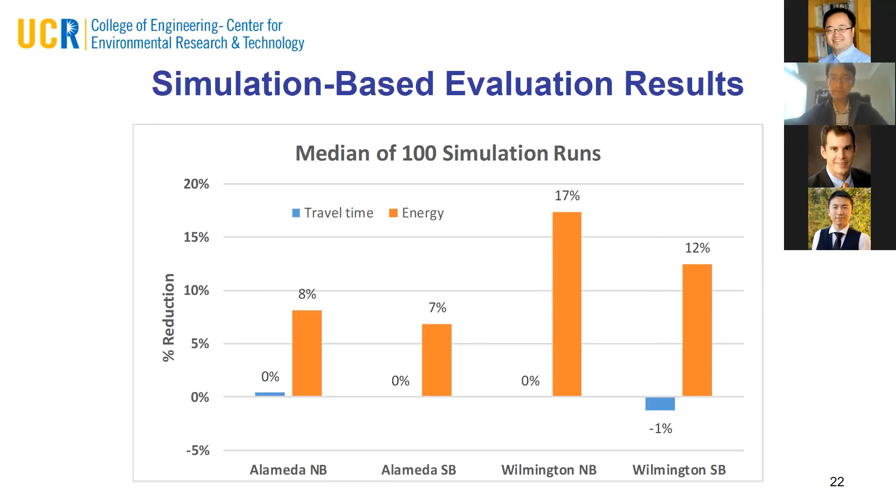So just to wrap it up, we were successful at doing the field trial and demonstration of the connected eco-driving system for heavy-duty trucks. And that's thanks to the strong partnership between all the stakeholders from both public and private sectors. Early evaluation results of the system are promising. From the initial field results, we see a fuel saving of 4% to 9%. But with the extensive simulation evaluation, we see that potential energy savings are 7% to 17%.

You may ask why it's so different. One of the things is that in the field, it's a human driver. But in the simulation, it's the optimal trajectory. So whatever optimal trajectory our algorithm decides, we can implement it, which means the simulated truck was able to follow that trajectory precisely. But in the real world, the human driver was not able to do that, and that's why the benefit in the real world would be lower than what you would get from simulation.

Based on what we have found so far, more work is still needed. We want to see the benefit in the real world under a variety of scenarios, so more real world driving data collection is needed. And as we can see, with a human driver it's very hard to follow the optimal trajectory precisely. So one option could be to automate the longitudinal control, and have the truck follow the optimal trajectory automatically.

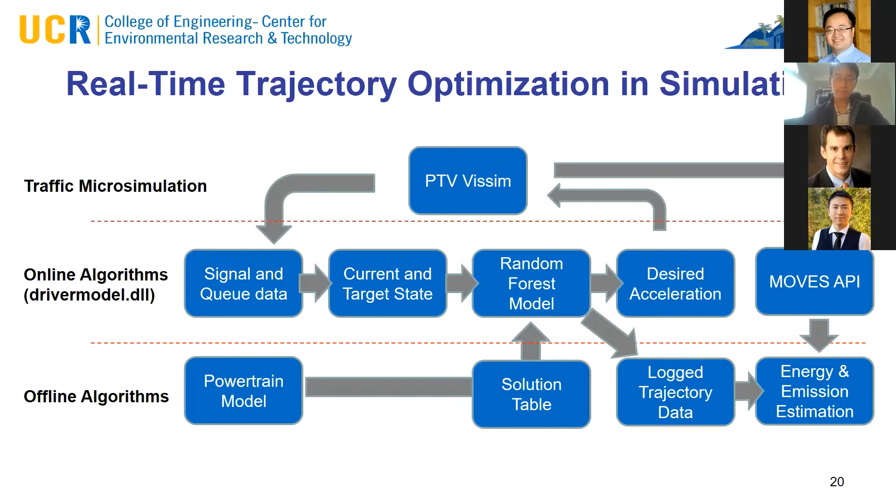And the follow-up question is, you showed that there was a demo to public agencies or other stakeholders. How do they receive this kind of new technology? Do they think this will be great for their cities, for their agencies in the future, or do they think this is just good to have but not necessary?

Yeah, I think there is a lot of interest from the public agencies, but they're still unsure of the effectiveness because on the demo day, we were not able to answer that question. We generated a lot of excitement about the technology itself, but at that time we didn't have the evaluation results, so we were not able to tell them, if they implement this technology, what the potential benefits to the driving public are. So later on, after the end of the project, we hope to organize another workshop so that we can show them the evaluation results. And hopefully that will spur more interest for them to move toward more implementation.

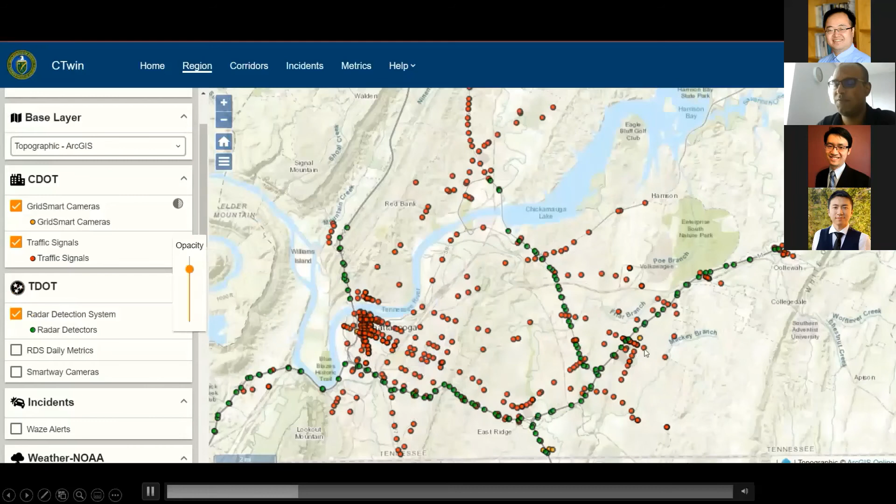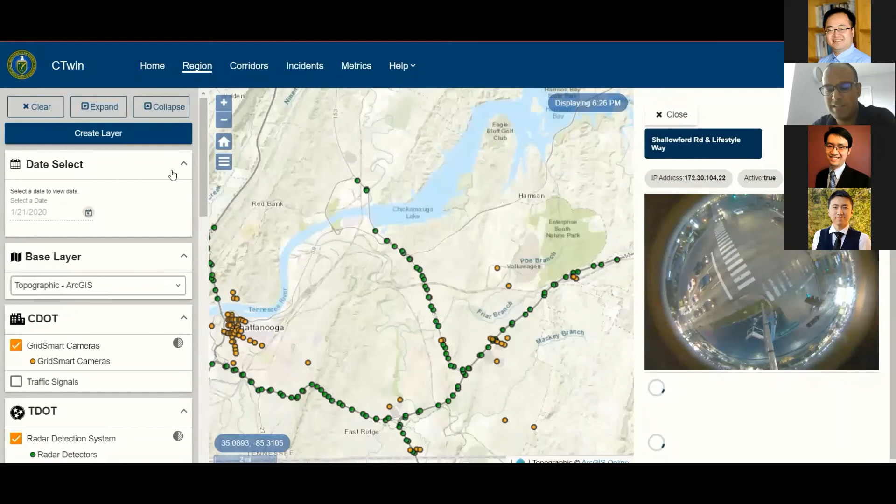We also have all these intersection level cameras from GridSmart. I believe they're close to 100 now in the city. They're actively installing more. We also found interesting things, like you see that node data on the right there. That's because every time one of these cameras are reset because maybe it moved a little bit and somebody hits a reset button, what happens is the zones that are assigned begin to get new GUIDs, so new IDs, and that breaks the history of what that data used to look like. So since we discovered that, we've architected it in a way that the provenance of the data is maintained.

But like I said, I captured this video back in January. So as you can see, you can query this data, look at all kinds of things like the SmartWay cameras that Dan has been using for a lot of his work. You can bring all kinds of other related data such as Waze and so forth.

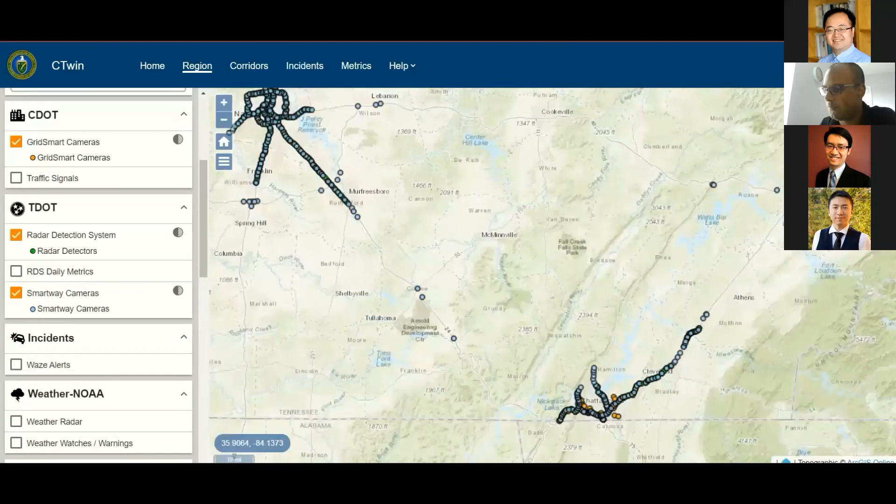Let me see if I can forward this just a little bit. With Waze running, my mouse becomes really slow. Well, let it play out then. It's probably 5 minutes more.

So this goes into illustrating that we can bring in infrastructure data like the local roads, the ramps, the fire stations, law enforcement, schools, things like those. It's interesting because often when there are incidents that are happening, it's important to understand where that is happening and under which jurisdiction they fall.

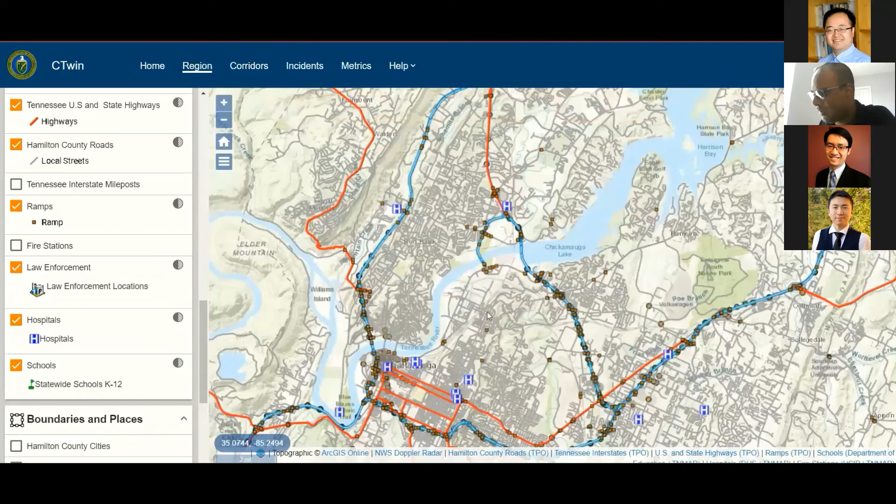What's also pretty common in the traffic world is to look at things along corridors. So we have a way to define a corridor like that blue box that you see, and then it will pull up whatever sensors are available in that bounding box region. You can slice and dice and start looking at this data. So it'll pull in the radar detectors, the grid smart cameras, other feeds as well.

Now, we also have an area where you can look at incidents, and these are classed by fiscal year. Again, at the time of this recording, that live integration of these feeds wasn't completed yet, but now we have all of those feeds and all of these different categories of incidents and being able to slice and dice them now available online. This is what it looks like for the whole year, heat maps of incidents by time of day, which can then help inform which areas one might need to start looking into.

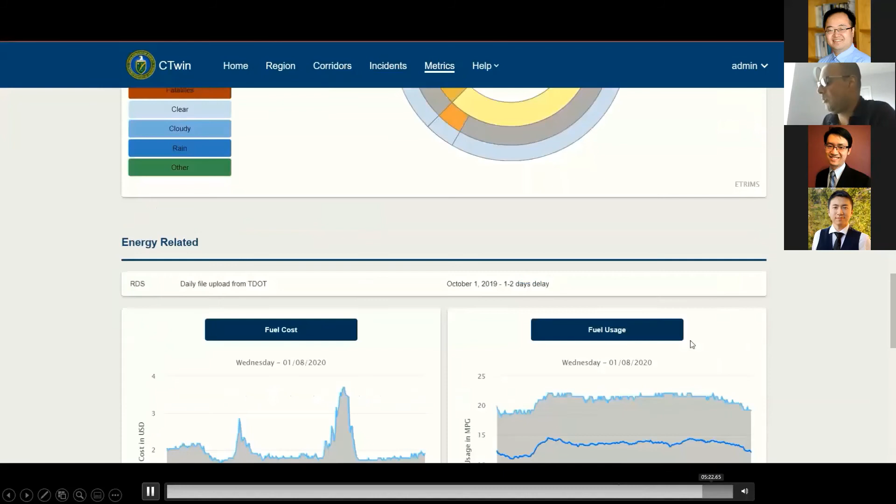There's also metrics, and I'll talk about that briefly a little later. We built it in a way that someone can go in and start using a quick start guide. For example, what you're seeing here, there's extensive help to jump into the tool and start using it.

All right, so moving on. Here's just a screenshot. I always keep a screenshot in case the video doesn't work.

But in terms of metrics, we've looked at, like I said, the mobility metrics. So there's macroscopic and microscopic metrics there. We've looked at safety. These include things like looking at injuries per capita and also at intersection levels. And then, of course, the energy usage.

When it comes to looking at a specific corridor for starting to investigate what we could do with employing control strategies, we started with a place called the Shallowford Road area. For those of you who know the Chattanooga area, you'll know there's a big mall there, and it sees some pretty bad traffic.

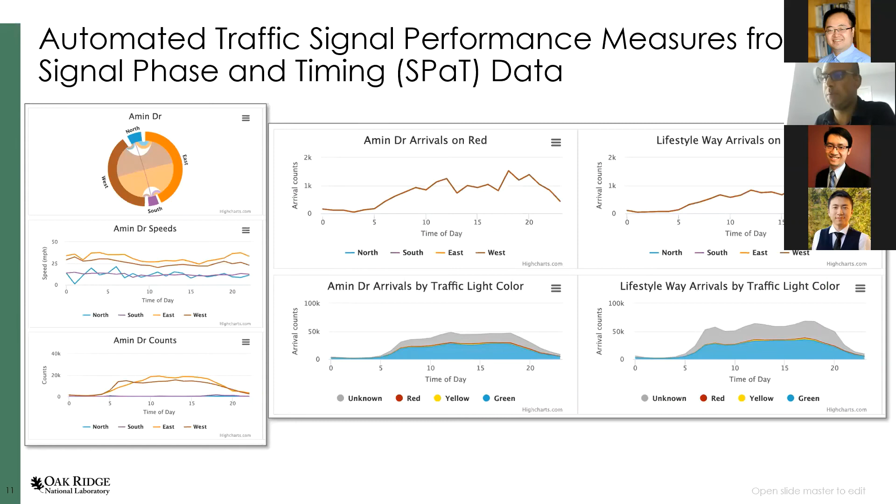There was an extension of this work as well, where we could have all these plots to look at arrivals on red and how those are changing as we make changes to the signaling infrastructure.

So you could pick a certain time of the day and then identify how well a particular lane design has worked. Right now we are awaiting review on this—it's been submitted to a venue.

And then we've also been looking at freight, particularly trucks, and how trucks are moving in the area. I want to distinguish between trucks and freight here. Understanding how trucks move through this area is quite important, because by different estimates, it's either the 4th busiest freight corridor or the 17th busiest freight corridor. Either way, it's a busy corridor.

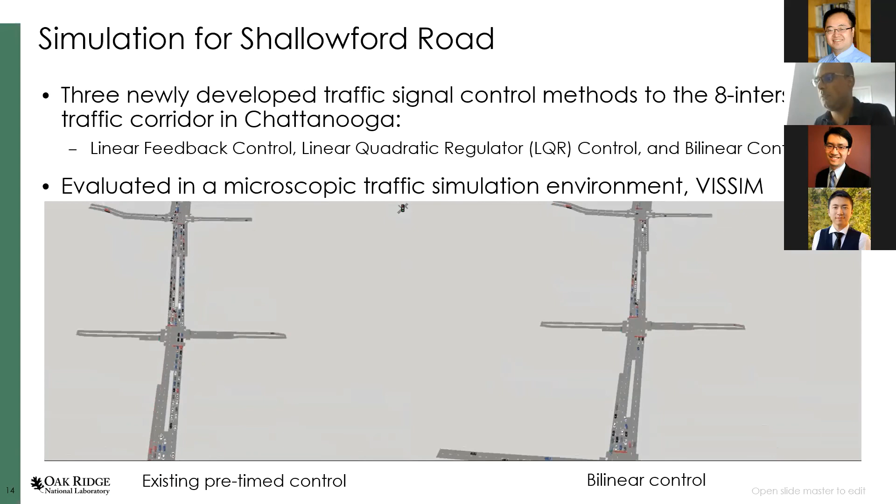That said, the ecosystem we have built allows us to look at a bunch of other things. Several projects have been funded in this area now. Mina Sartipi at UT Chattanooga has a project that is very related to the CTwin work we are doing, so we are partners in that. She has a test bed along MLK Boulevard, Martin Luther King Boulevard.

A colleague of mine has a project now with Toyota, and I'm a co-PI on it. There are aspects we've built with CTwin that will facilitate that project as well. In that project, we're beginning to look at everything from the drivetrain to the intersection and the corridor, data driving that entire ecosystem of control. So there's a lot happening in this area that we are now poised to take advantage of and do something cool.

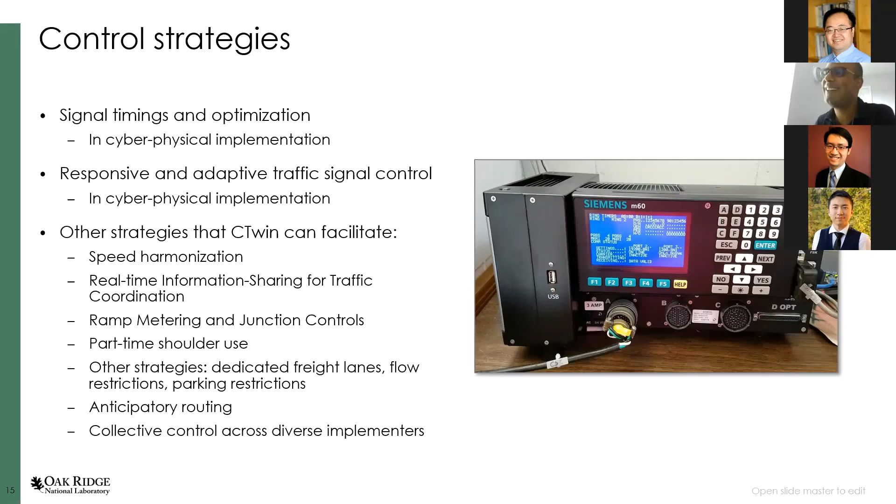In terms of demonstration of what this can do, we had found earlier that along the Shallowford Road corridor, we estimated about 18% energy reduction was possible in our simulation work. Then back in February, Kichao and several others worked on implementing an initial test of the values we were getting using the existing software there. We call it the soft test.

Having seen the outcome of that, we saw a 16% energy savings in the field. So we were exceptionally encouraged by seeing what we see in simulation and what we actually actualized. That is why I say that 20% savings for a whole region is definitely doable.

As a follow on to that, this was an initial test of whether we could do things here. The collaboration with Siemens was maturing, and we worked to run a full field test in the last week of August. We ran this test Monday through Thursday. Thursday there was an accident, which made the experiment a little different on that day.

But what you're seeing here has been a very interesting highlight. It took a while to build this up, so there was a lot of vetting done to make sure that the NTCIP process of communication that Siemens has, we could use that and implement it well.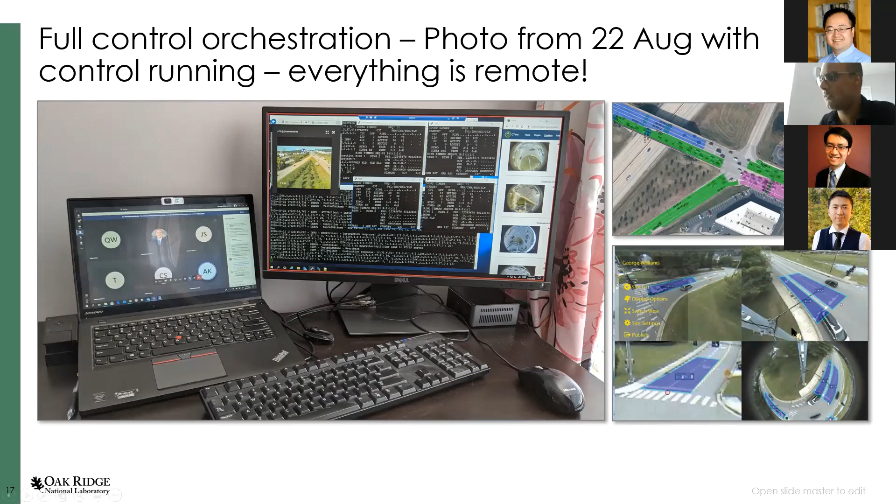So this is ORNL code, and these are the interfaces of the signal controllers, and here's some video that we were watching. But all of this was run completely virtually from our homes, and we executed 4 days of a control experiment in the city. We're still looking at the data—I don't have results for you right now—but just being able to do this remotely seems like we could write a paper on it.

All of this really is getting to this integrated ecosystem of travel behavior and how travel is happening. There's this decision aspect that's happening, there's the communication aspect of all of this, there's people driving all of the ITS and the activities, and the entire performance of this ecosystem then gets measured through the metrics.

So that's what we're getting into now. Here's the next phase of our work. We're looking to really scale it up. The orange box you see in the middle, that's the existing extent of our work. But we are expanding it up along the I-24 corridor, hopefully get some of the data feeds that TDOT has been installing along I-24.

Extend some towards Knoxville area, which is 75 this way. We definitely want to get more into Georgia and be able to capture some of the dynamics that are happening between Chattanooga and Atlanta, and then some along the I-59 towards Birmingham. All of this, we're going to have to rethink our data lake to be a little bit bigger.

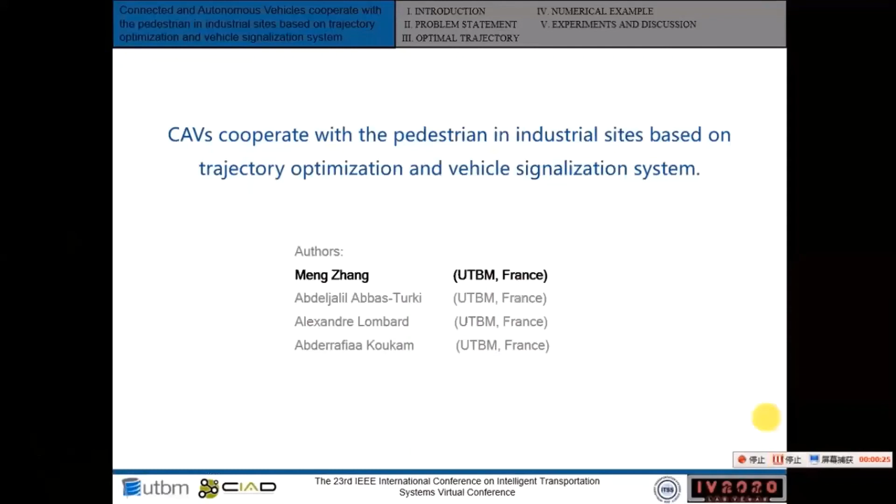In industrial sites, based on trajectory optimization, vehicle signalization system. First, I introduce briefly the background of this research. As is shown in the picture, road space sharing is a complex decision-making problem, especially when the CAV conflicts with pedestrian traffic. Many factors should be considered. In the picture, the pedestrian wants to cross the road, and there is a car. They must share this road resource.

In such a situation, two main contradictory factors must be studied. The first one is safety. That means no collision and low potential collision between road users, and another one is efficiency. We need to optimize the crossing time for both. As is shown in this picture, the study area of interest is the unsignalized crosswalk without lights and zebra crossing.

Second, control the longitudinal acceleration of CAV to achieve the balance of safety and efficiency. The third one, only one pedestrian in our scenario. The second part, we build the model for such problem.

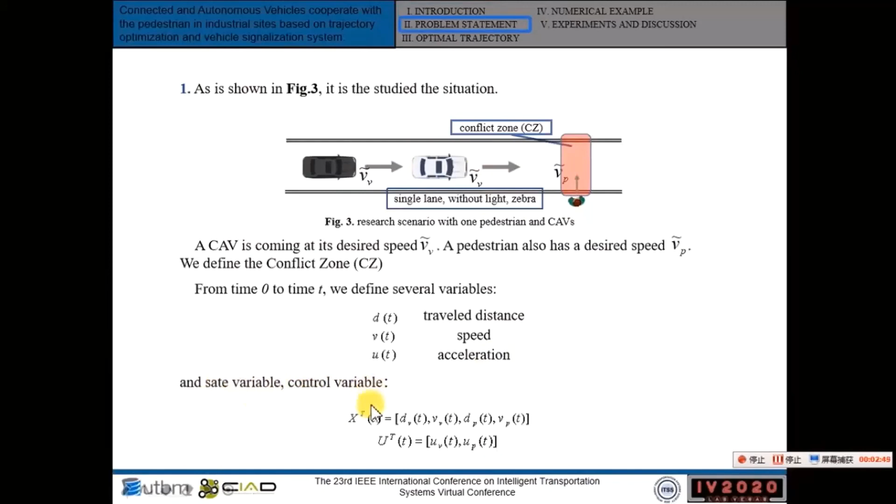In this road, we define this area called conflict zone, CZ. CAV is coming at its desired speed, and also the pedestrian has a desired speed, VP hat. From time 0 to time t, we define several variables: D, V, U. They are traveled distance, speed, acceleration, and we also define a state space control variable, xt and ut. According to the definitions above, such a state space model can be easily constructed.

And considering crossing efficiency for the agents, we give an objective function to minimize. That means the difference from desired speed. WP is the weight factor for pedestrian. We integrate the squared value during the crossing and add it for the cost function. And of course, we have some constraints for these variables. This is the constraint for acceleration and for velocity.

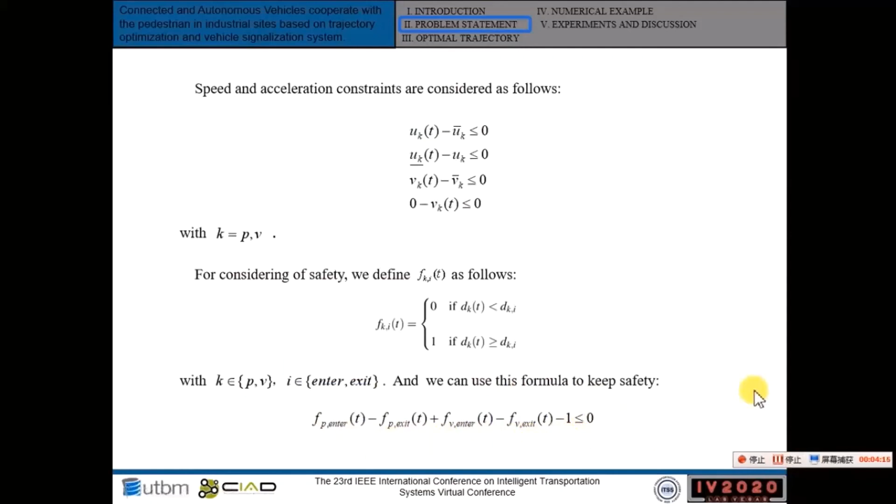And considering safety, we define this function, and this one can keep only one road user in the CZ at any time. This function can keep there is no collision. So finally, we can get the whole trajectory optimization problem. This is the state model and the cost function to minimize. Obviously, the last one is a nonlinear condition.

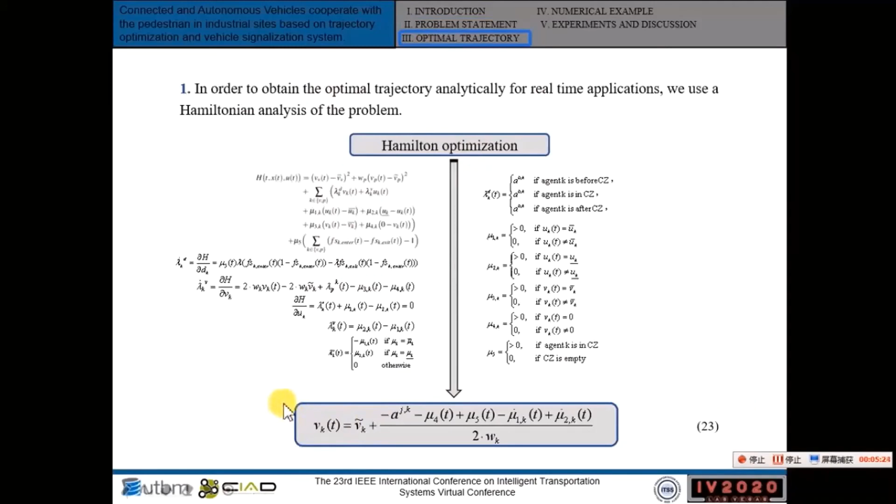The third part calculates the optimal trajectory. In order to obtain the optimal trajectory, we use a Hamiltonian analysis by using Hamiltonian optimization. Finally, we can get an important formula. This formula is the optimal speed for autonomous vehicle and for pedestrian. According to this formula, we can draw the speed curve of the leader and the follower.

We noticed that the first accelerates to let the second cross sooner. Both behaviors are communicative. The leader agent accelerates first and shows its intention to cross CZ first, and at the same time, the second one decelerates, meaning it gives the right of way to the leader to cross first.

This is the optimal solution, but there is another important problem we have paid attention to. The human behavior is dynamic and adaptive. If the car is the follower, it must be able to stop if the pedestrian changes its speed. The car must keep enough space to brake. TDF is the deceleration time for the follower obtained by solving the following equations. SC is the safe condition. It can keep that there is no collision in the future.

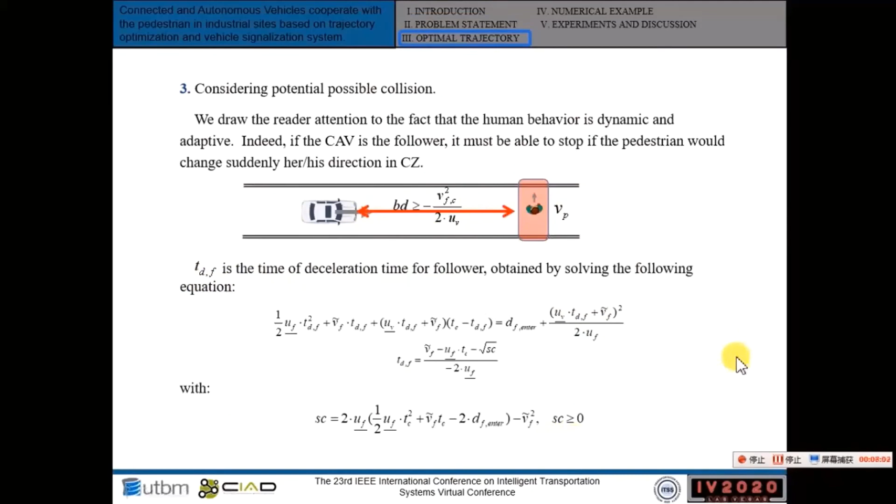2 scenarios tested. In scenario 1, the pedestrian crosses in an ideal way in the optimal profile, and in scenario 2, the pedestrian crosses in an ideal way at the beginning, but he stops at 0.1 meters to the exit for testing if there is collision.

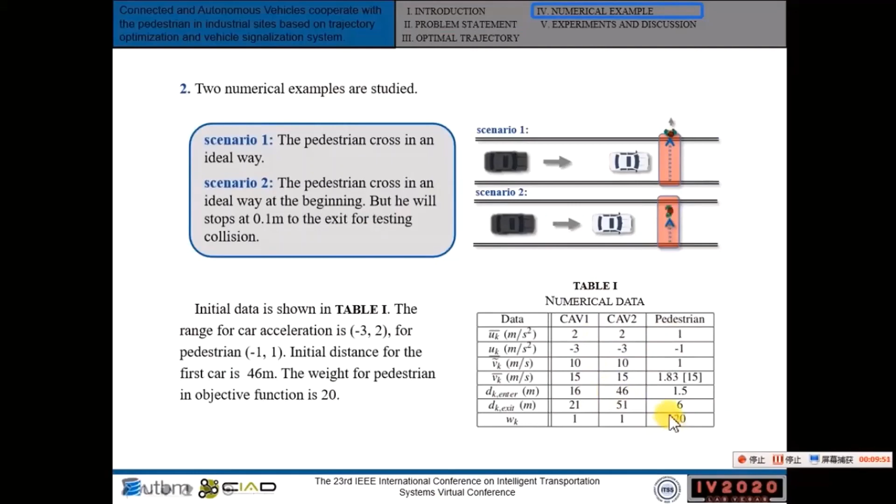Initial data is shown in table 1. The range for car acceleration is -3 to 2, and for pedestrian -1 to 1. Initial distance for the first car is 46 meters, and the weight for pedestrian in the objective function, we set it to 20.

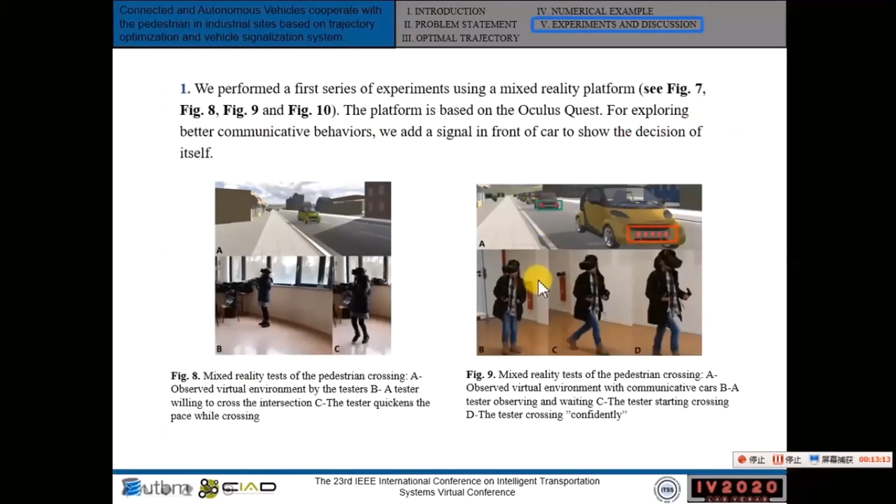In addition, observing the curve of the second experiment, the car continuously adjusts its speed according to the state of the pedestrian and achieves the purpose of passing CZ in the shortest time under the conditions of safety and acceleration limits. Finally, let me show you the 3D simulation from third-person view. Here, the cube represents a pedestrian when he approaches the road.

Red light, so we cannot go. And at the same time, the second car prepares, so I can cross before the second car. Again, red light, I should wait. We test if there is collision. I stop there.

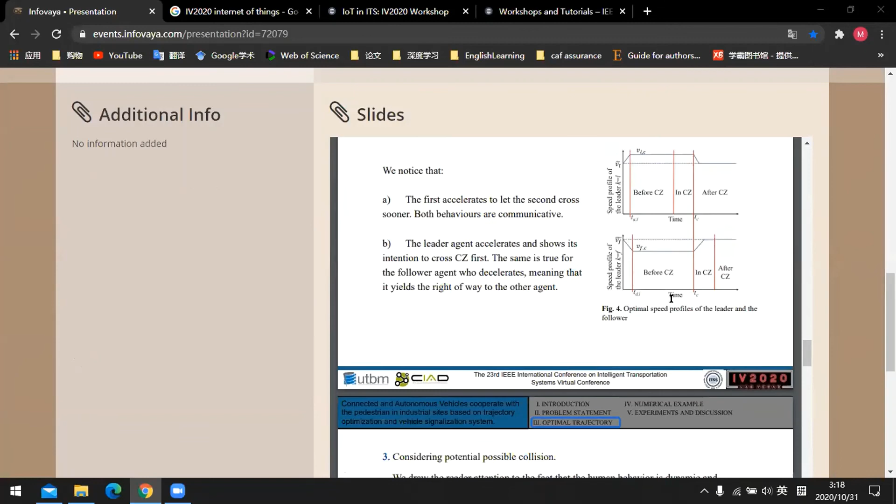So, okay, I see. And yes, we add this condition for safety reasons. If the pedestrian crosses just like the optimal curve, the car will behave like this. So we want to optimize the whole system.

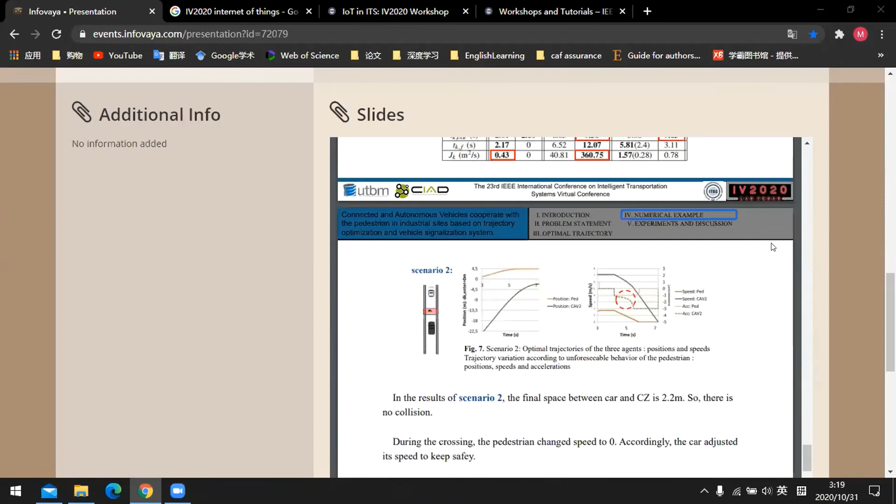And is there any speed guidance for the VR? I guess the pedestrian is wearing the VR, right? Is there any speed guidance or just the green or red indication for go and stop? Sorry, could you please repeat your question? Yeah, so for the VR for the pedestrian to cross the intersection, we saw the red and green light for indication, right? Yes. Is there any other information like speed guidance or detailed information, or just the green or red lights?

Not yet, just the red light. This is the only signal between pedestrian and the vehicle. And we know from previous research that the pedestrian can get information according to the speed and the acceleration rate of the vehicle. So we add this signal. It can help decrease the reaction time of the pedestrian.

I see. So last question, actually related to this one as well. Did you consider how to determine the presence of pedestrians and their intention to cross? So how do you predict the behavior of pedestrians? Yes. In our research, we didn't consider the detection of the pedestrian. So in the experiment, I set a boundary here. Just if the pedestrian enters the boundary, the car will use this control algorithm.